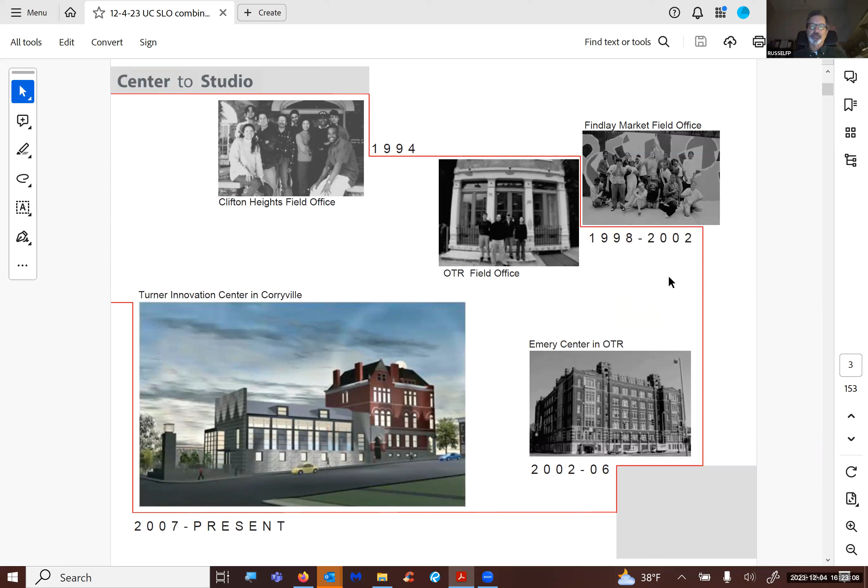The Design Center—I'll show you a few projects to give you a flavor of the kinds of things we have done—but Design Centers are nothing new. Many universities have them; I think around 200 exist around the country. Many are affiliated with universities, but others are standalone nonprofits started by professionals who want to serve the community. Their activities range from technical assistance, which I'll show you a lot of, to advocacy, policy, getting city leaders to move in a progressive direction, and of course education in different forms.

We worked in all kinds of areas, but as I said, the issues we were trying to address were what you've heard called wicked problems, or small wicked problems, and they really required multiple disciplines. So we employed integrated students from all the disciplines—art, fine art, industrial design, architecture, planning, and in later years, engineering, business, real estate, and other disciplines. All of this was directed towards real problem solving and real projects that would be implemented in some form.

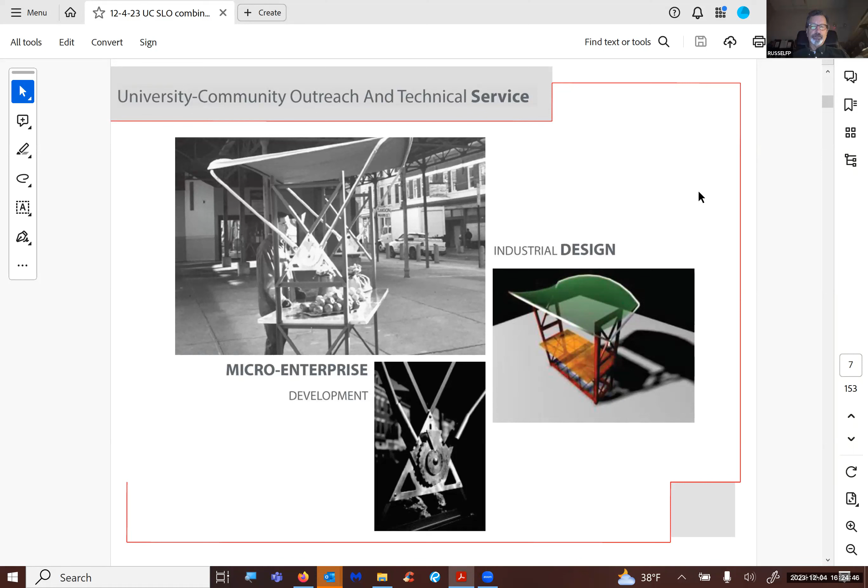Here, for example, is a mobile vending stand, used to help develop micro enterprise among vendors who didn't have the resources to set up their own storefront or even their own cart.

Of course, we worked with larger institutions as well—the Cincinnati School District, to develop a concept that was new at that time. This goes back to the early 2000s: that schools could function not only as specific locations for the curriculum, but also for after-hours facilitation of community-building events and programs.

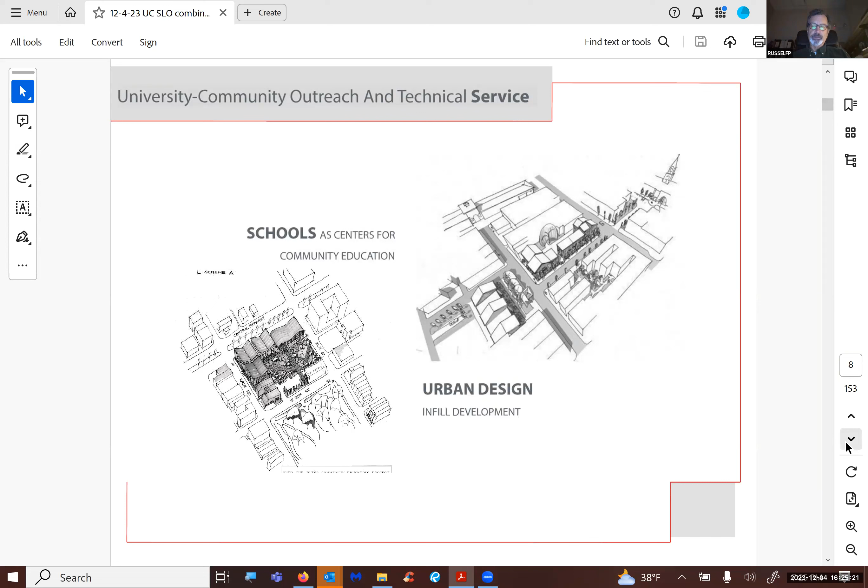And plenty of urban design, because that was my area of expertise. We did that throughout the region, including the urban core of the city. But as I said, there wasn't a lot of traction for interdisciplinary work, even though there was a bit of propaganda out there for it.

So the concept was an off-campus classroom where our interdisciplinary students could meet, because they wouldn't be in any of the classrooms of their schools, which were jealously guarded by their administrators for the use of their discipline only. Instead, this group of students could come to a neutral place where they could meet and work in the studio process, and most importantly, a place that community stakeholders could find, because they never want to come on campus. It's so hard to find anything on campus, and it's sometimes intimidating for them.

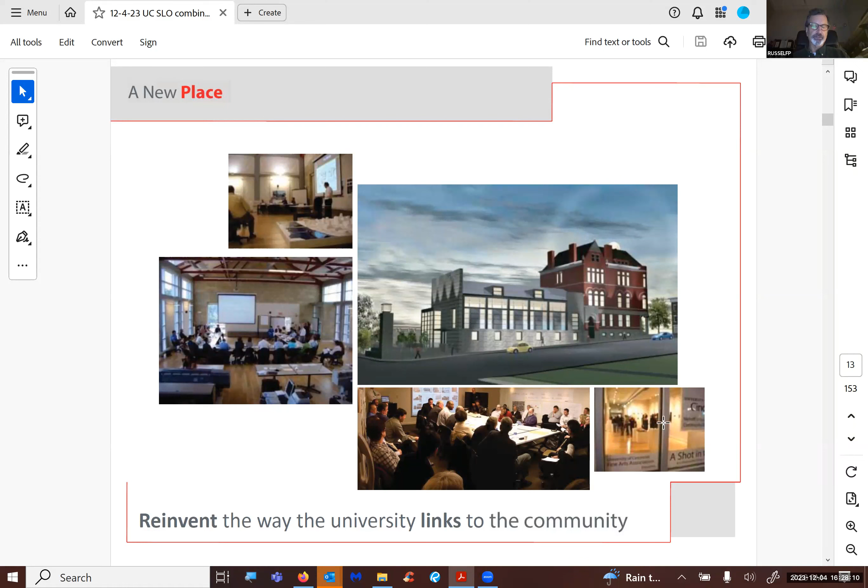So the facility that we ended up in 2007 was purpose-built for us. It's a beautiful space, basically a gym-sized studio space located on the back of a historic building very close to campus, and it accommodates the studio, public presentations, public meetings, exhibits. We have a gallery out front. So it was really set up to provide this nexus between the university and the functions of the studio and the community. And it functioned pretty well for many years.

It's collaborative, of course. We involved all kinds of actors in the community, from leaders in the nonprofit sector, as well as policymakers from the city, as you do in your studios. Most importantly, it was interdisciplinary, because the faculty didn't have a way to collaborate even within our own college.

Sounds simple, but it is not. And it was easy to use the city as the focus of these interdisciplinary efforts, because almost every aspect of the city presents a wicked problem. We also know that more and more our culture, our society, and our demographic shifts are pushing us into cities. So that is really what the world is becoming more and more about.

But the methodology was one to promote collaborative, community-based instruction that would be off campus, with external funding, which we did for many years. And then the outcome, of course, would be those that you would expect: design focused, physically design oriented, enriching student experiences in a unique way, and contributing to the outcome in our community in one way or another.

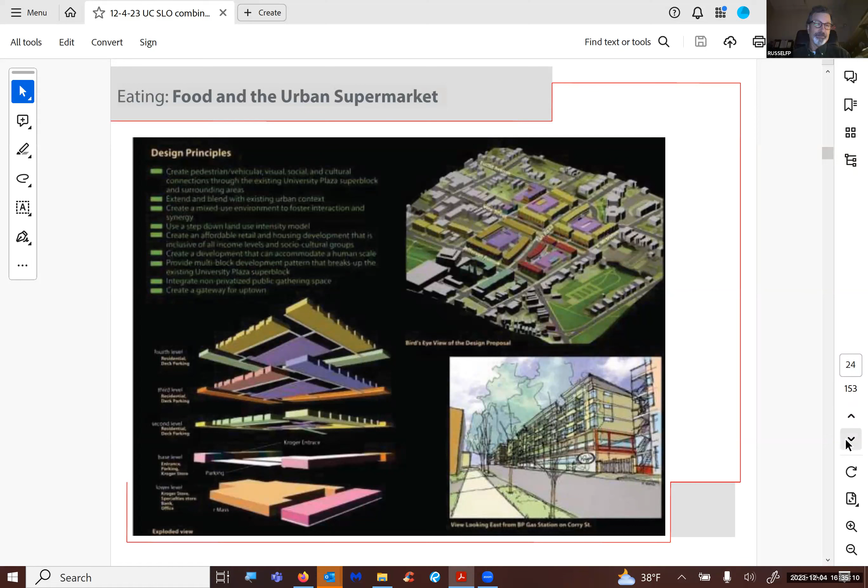Nothing new today, no, not surprising at all. Did they do it? No, they did not do it. They reverted almost immediately to their suburban style. But that didn't keep us from continuing to critically investigate and understand big boxes and little boxes.

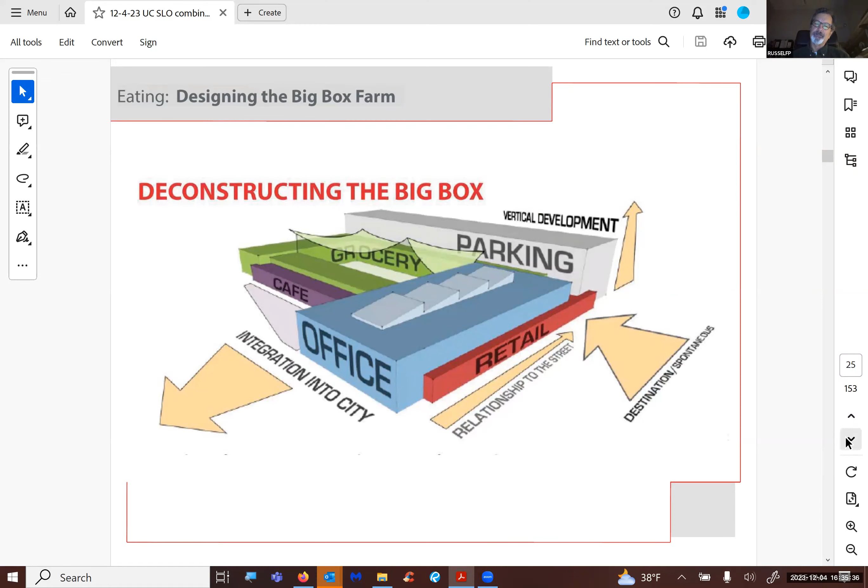So a lot of work went into looking at not only the food retail boxes that exist around our fringe urban area, but also even now within the urban center. So that was always a fun experience and experiment.

We had interior designers working with us and graphic designers. So we had the ability to visualize some of these physical spaces in a way that you rarely get a chance to in one of your specialized studios.

And we also had on the other end of things, large scale interest in understanding the demographic issues that come out of urban planners and urban geographers who participated. Sociology students, anthropology students participated in the studio as well. That really made it a rich environment.

And food was, it seems, quite out of the ordinary at that time to think about organizing design studios around food, but it really tended to bring the disciplines together for lots of reasons that seem obvious now. But at the time, it was not considered a good idea.

It worked out well for us because we felt that the food topic was a way of touching so many different demographic groups, cultures that exist within ethnic groups that exist within our area, and something everybody could relate to. So we felt it could really cut across some of the barriers that existed between people in our city, which is very segregated. What we found out, you've seen a million of these community garden projects.

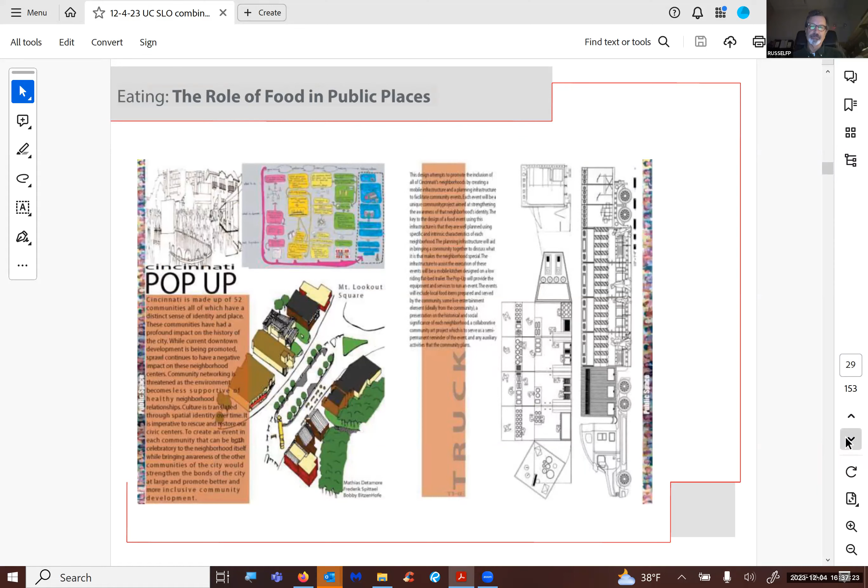Back in 2003, we didn't have many street vendors other than the hot dog stands you'd see regularly. We didn't have food trucks. I won't say the studio led to the food truck culture that now exists in our city, but it certainly opened the door to thinking about that. Later on, we were able to host what became an organization of mobile food vendors so they could negotiate with the city on where they could park, which up until then none of the restaurants and bodegas in the urban core wanted, because mobile vendors took their business. But through advocacy efforts, the vendors as a group were able to lobby the city and get places to park, and now it's very popular.

We could bring some of the studio project ideas to fruition in reality. Interior design and architecture students had a chance to work with a nonprofit job training program disguised as a pizza parlor, which wanted to occupy a storefront in the core. We worked with them through both the Community Design Center, as a technical service project, and the studio, to visualize the storefront and then actually build it. Students had a chance to design-build primarily the finishes, but the interior design students in the classroom actually laid out the entire storefront.

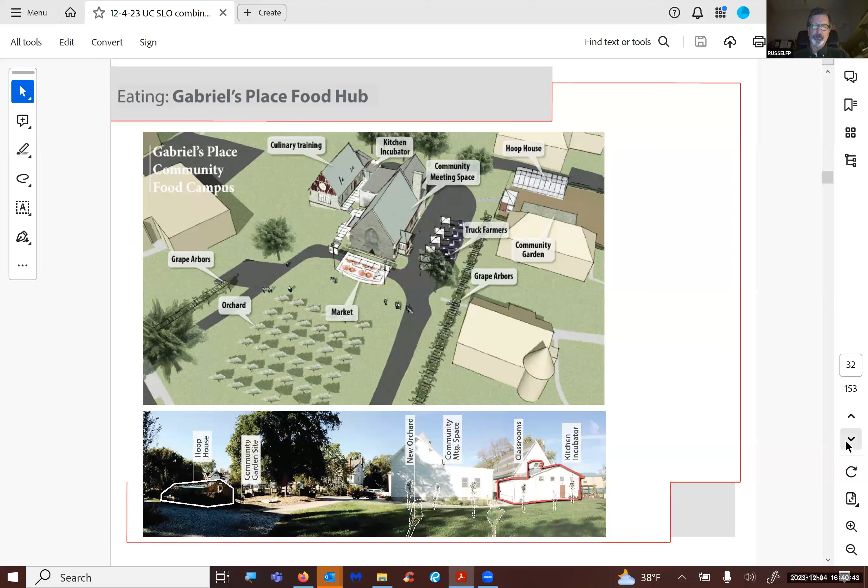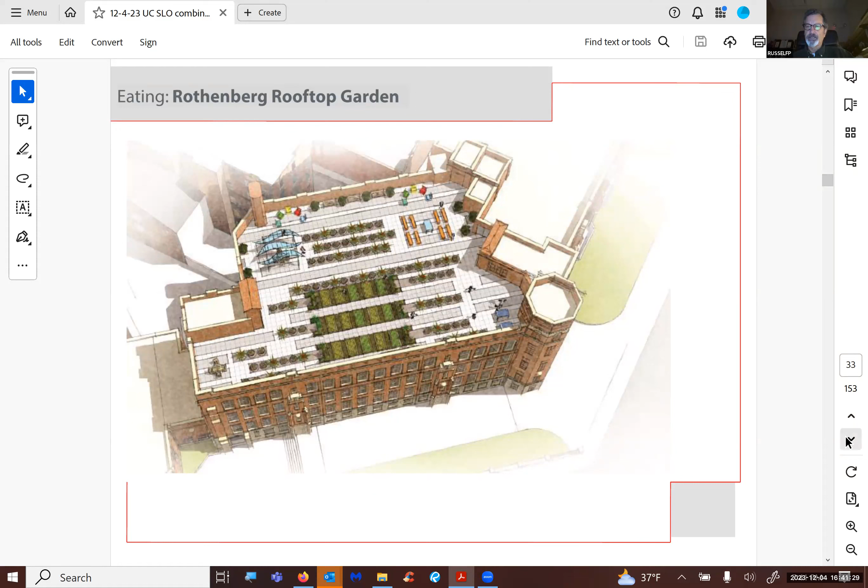And then a really fun project: a 1920s school building in the downtown core had a roof structure originally designed to have an outdoor playground on the roof. These were the days tuberculosis was a major epidemic, and they needed to get students outdoors during recess, but in the dense urban environment, they couldn't put them down on the street. So with the structural capacity of the roof, we were able to develop a rooftop garden for them. This teaching garden still exists today, serving this primary school in the center of Cincinnati. They produce a fair amount of food used in the cafeteria, and their science classes come up to study the botanics of the garden.

And then we got into something we didn't expect—I'm an architect, I don't know anything about food, right? But one thing leads to another, and we realized we needed to help the region develop policy on addressing food issues at a larger scale. Community gardens, sure, but what about small farmers in the hinterland and how they connect products to urban points of sale? What about sustainability issues and advocating for those through policy at the city or county level? So we supported this idea, which existed first in California, called the Food Policy Council, to develop a strategy and advocate for a comprehensive food system in our region. This led to the establishment of the Greater Cincinnati Food Policy Council, which still exists today.

Ironically, the entity most resistant to progressive food policy was our own university. As we developed this concept of the Regional Food Policy Council, we were constantly asked: what's the university doing with food? You have 40,000 students, certainly consuming a lot of food resources. What are you guys doing? So we spent a year looking at the university and developed a pretty critical report on how their food systems function on campus.

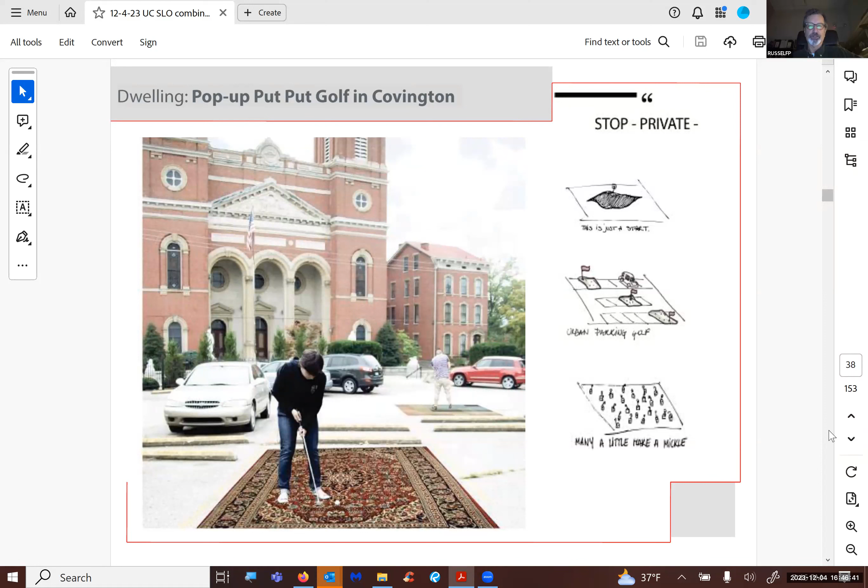Thanks. Dwelling, being in space, experiencing space, living space experience. You undoubtedly had participated in some guerrilla urbanism. Our students had a lot of fun doing that with lots of different groups over time, going back to the early, late 2000s, when it just wasn't happening that much in Cincinnati, at least. So that was a lot of fun.

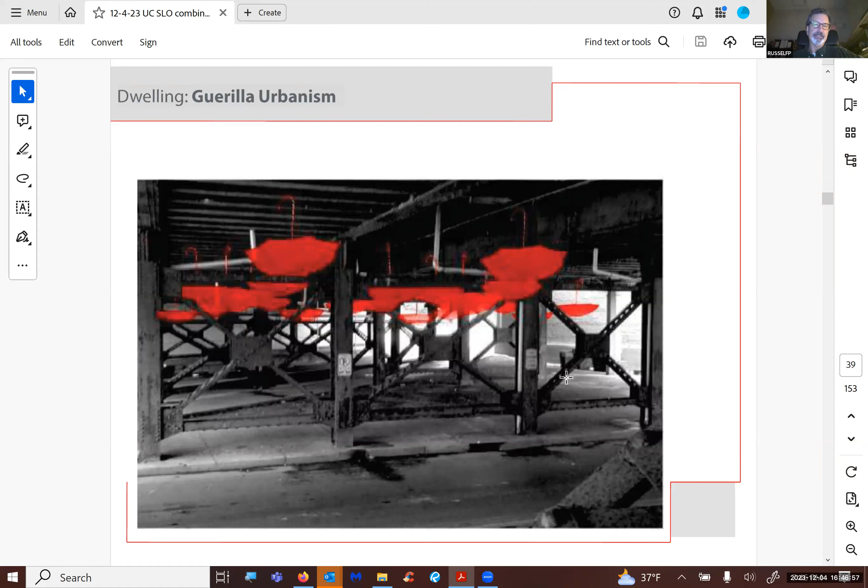How to activate space - some of these were implemented, some were not. This one was not implemented, but I thought it was a great idea. We had competitions for students to look at how to activate spaces in a guerrilla approach, to stimulate thinking within the community and among policymakers about how some things could radically change our perception, understanding, and experience of even the simplest spaces in a way that was really valuable.

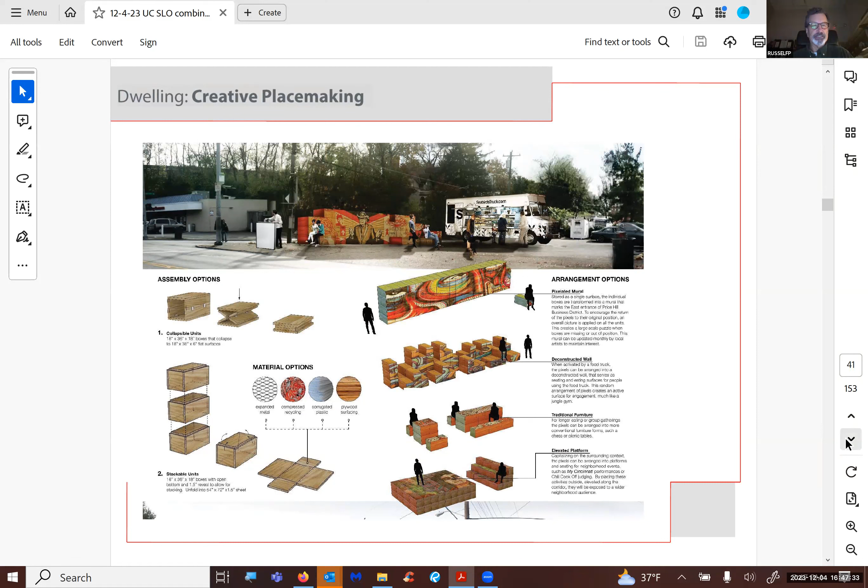Creative placemaking is something I'm sure you've been involved with, and that was something our students engaged in with numbers of community partners. Through the technical assistance aspect of the Community Design Center, we were able to implement some of these creative placemaking concepts.

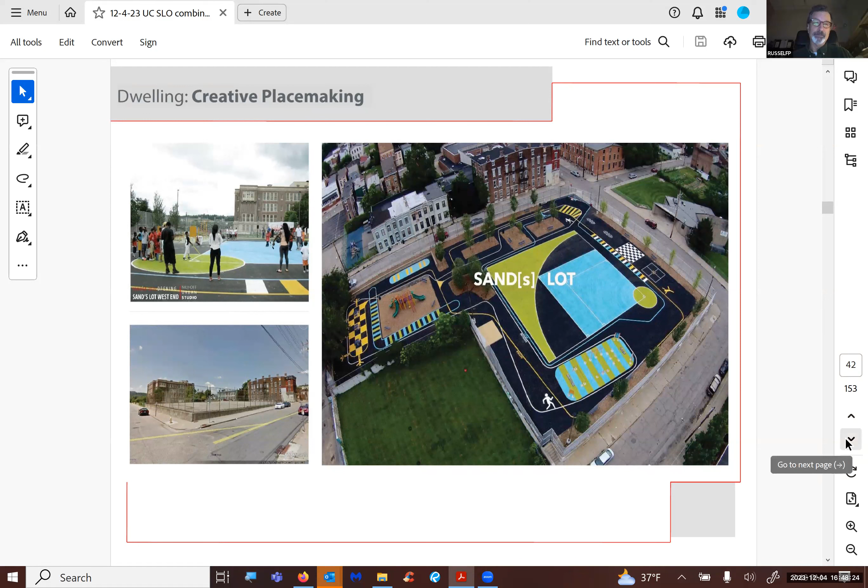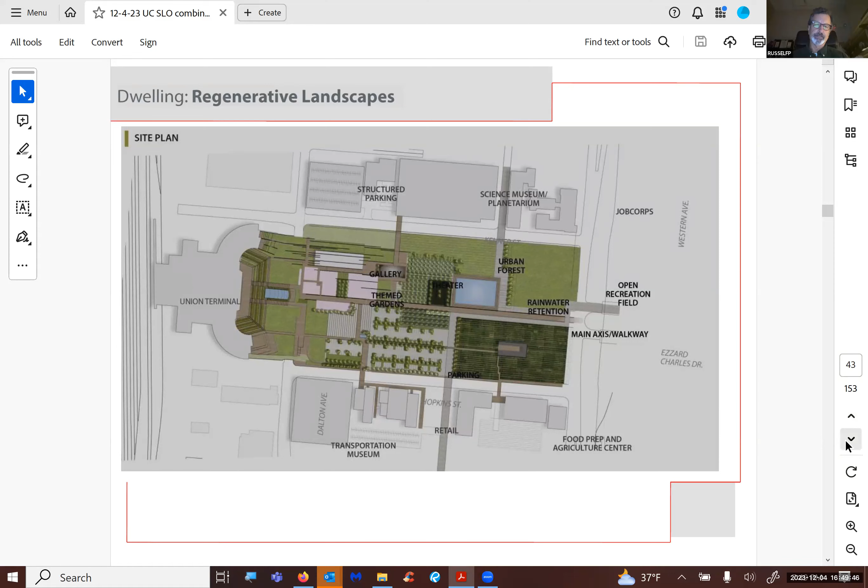Our interest was how that district could be reconstituted to be, in this particular iteration, an institutional district of more than just one, and how the space that knit it together could go beyond just providing a landscape, but could be a regenerative, productive landscape in a useful way. In Cincinnati, we have a tremendous burden of rainwater and stormwater - how we address it, retain it, divert flooding in our area, and of course, food production.

So we're constantly engaged in a bit of a political struggle. The studio was at a time period when the mayor was attempting to introduce a levy which would raise money to support the parks that existed in the city. So we were engaged at a political level at one point to actually promote a levy, which did end up failing, but was interesting to be part of that machine. The students got a firsthand look at sausage making in the political process.

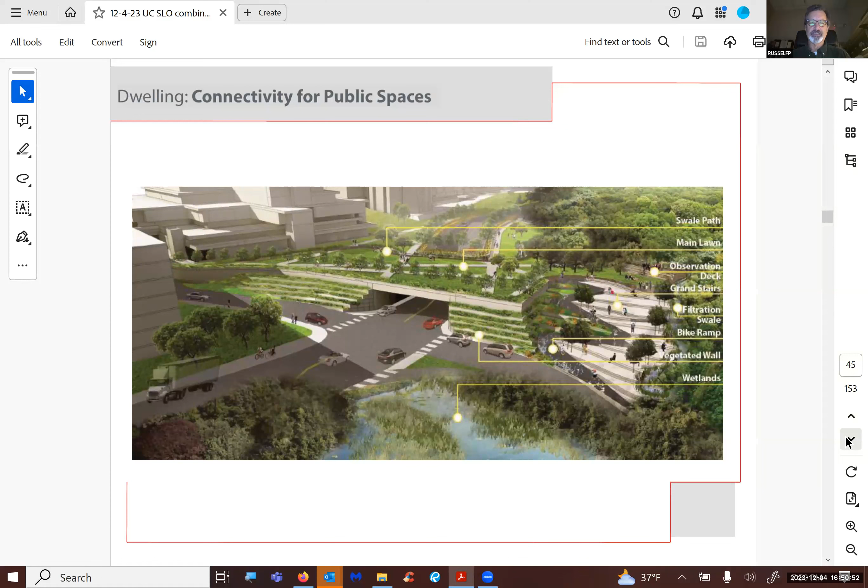Some of the proposals that came out of that involvement included this. This is the north side of campus, trying to bridge over between the campus and existing park, thinking about how development can occur in a friendly way, because it's not about the parks really. It's about everything that happens around it, and how that can activate the park, make it function on levels it wasn't functioning on earlier, and provide much needed activities and functions, in this case housing at the perimeters of parks that would put eyes on the park, make it safer, friendlier, and more activated.

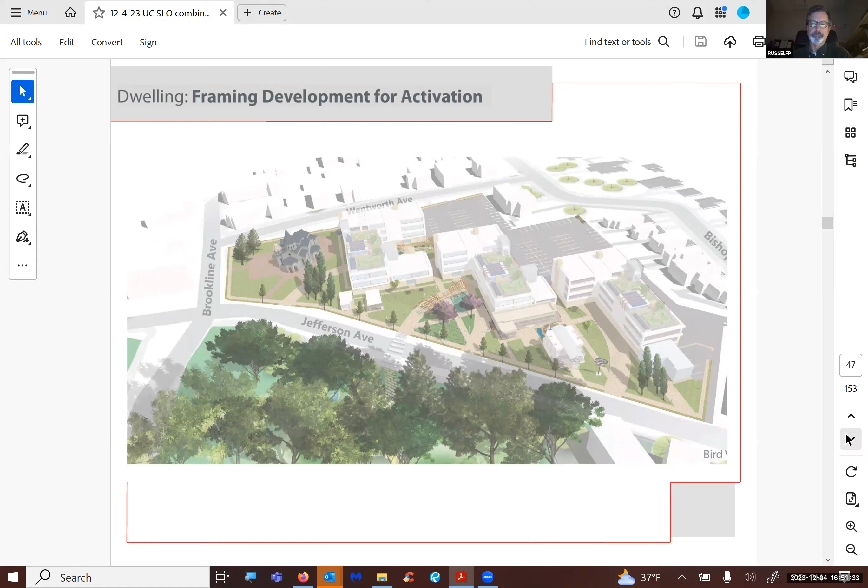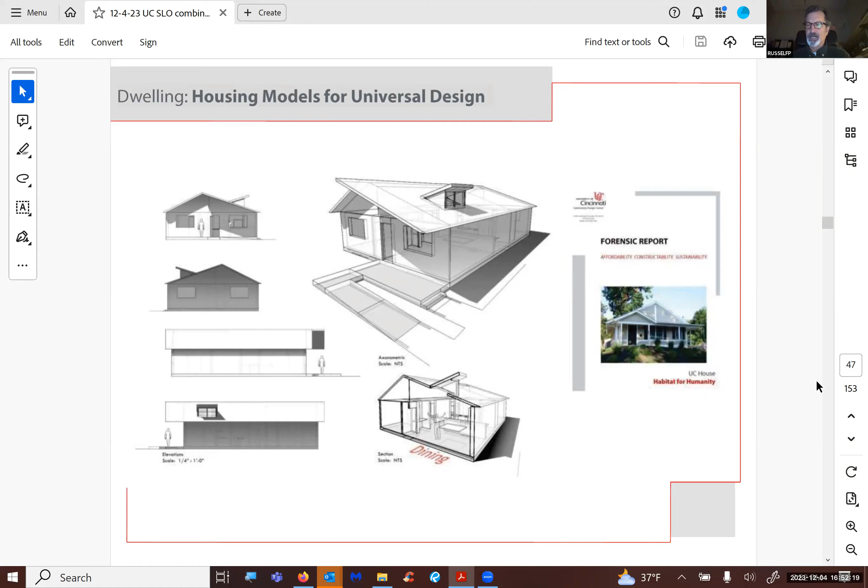And then the interesting part about this, we were able to follow up and do a forensic report. How did they actually utilize the materials as we suggested? How much sustainability was the final product? Did that represent?

Lots of thought going into how different districts of the city could be developed for new housing, infill housing, in a district composition that would create sub-communities, if you will, within the urban core. The urban core remains in large part very decimated here in this Rust Belt city. So lots of thinking about how we would approach infill and the affinity of different districts within the center.

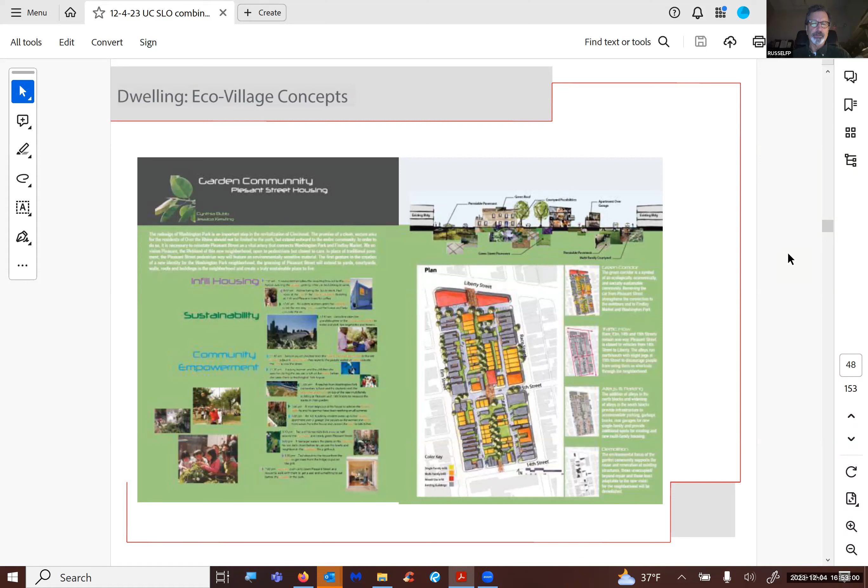Thinking about what we do with all the vacant space that exists in a Rust Belt city. We can't refill all those storefronts with retail - there simply aren't enough consumers, there aren't enough rooftops of residents in the city to actually supply a market for all that existing storefront space. So what do you do with that? How do you construct a model that helps policymakers promote an approach to the revitalization of the city that can address some of these typological features that exist, which is a multi-story building with a storefront below.

And then thinking about other models of dealing with emerging demographic groups, aging in place. How could our seniors stay in the neighborhoods they want to be in? How could they occupy communities different from what we typically see for retirement or continuing care communities, but constructed in urban cores that could take advantage of the amenities that exist there. The university asked us to look at whether we could do something near campus, so that old professors like us might want to live near campus as we age, cross the street and take advantage of all the facilities on campus, maybe engage with students long beyond our teaching years for a multi-generational experience - have students live in our building and look after us to some extent, or grad students with families who want to live near campus but want a multi-generational experience, creating an environment synergistic between the ages.

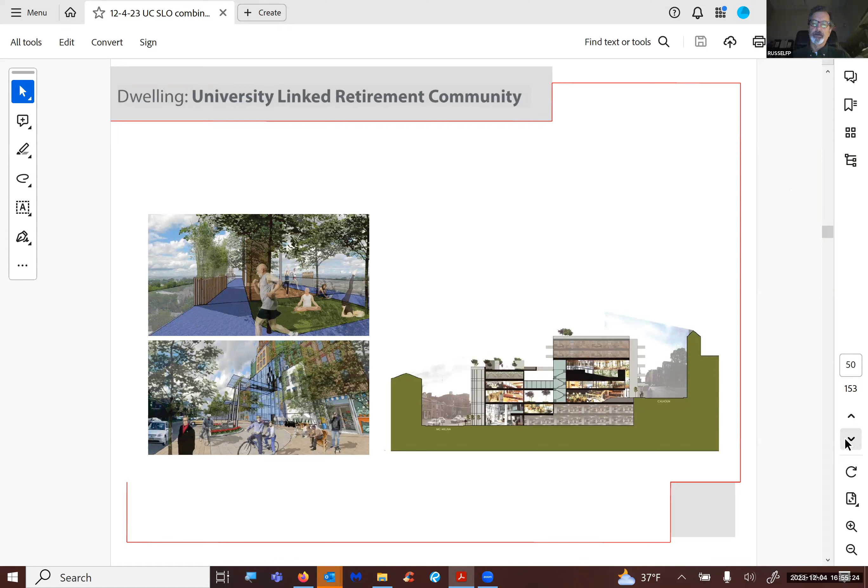So this was an interesting experiment. In fact, they tried to market this concept to alums of the university, and they're still working on it today. I've heard, although I haven't seen the plans, that they may develop something near campus that would reflect that idea.

Cool. Hey Frank, I have a question about your previous theme - have you guys thought of changing some of those storefronts into residential use?

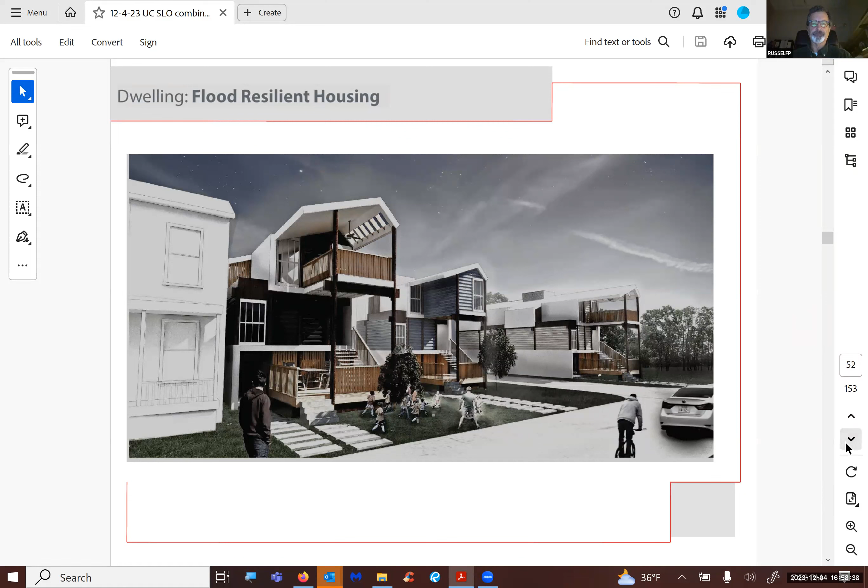Okay, I'm going to pause there for a second before I get into moving. Any thoughts or questions about dwelling?

I do have a question about something you mentioned. You talked about how there's a lot of vacancy in Cincinnati, and I'm guessing it's because of the Rust Belt and industry that moved out—I don't know too much about Cincinnati, but that's probably it. I remember in another class we learned about a small city called Garyville or something like that, and they had a lot of industry move out too, so they started downsizing their city, implementing measures to concentrate people into a downtown area that's not as spread out. But I don't know if that would work the same in a city as large as Cincinnati. So I was wondering if you do anything similar to that.

Yes, it's called the shrinking cities approach—trying to concentrate and gather functions in a way that's scaled relative to the markets or needs. Absolutely, I'll show you one image of that. That's exactly right, very progressive. There's a group—our partner center in Cleveland—that has published guides on how to address shrinking cities. Cincinnati, by Ohio standards, is doing pretty great. Northern Ohio has places like Toledo and Akron, old steel towns that literally lost all their industry, and they have all this infrastructure, miles of roads and things of that nature. So they do have to shrink and consolidate, and that's an approach we should all be aware of.

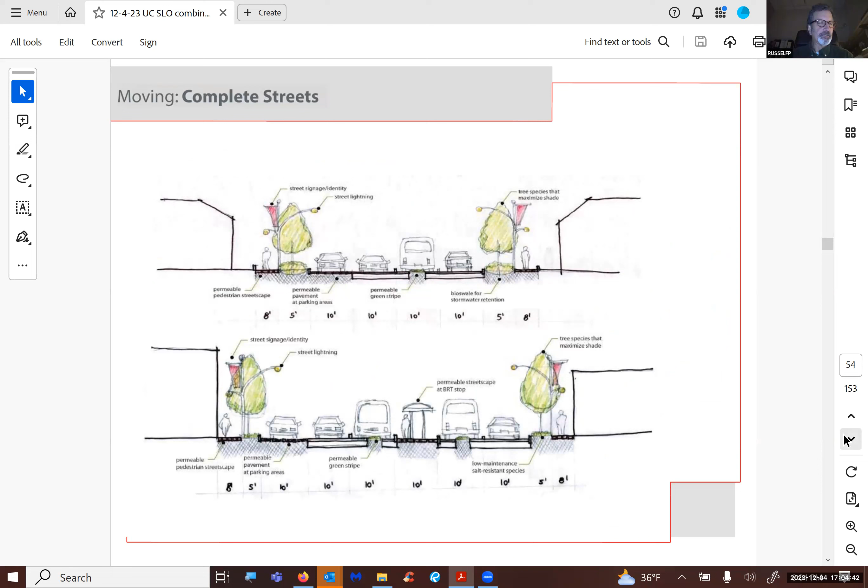So we introduced this concept of BRT, worked with our metro agency, and explored different approaches, many of those related to complete streets—it's got to be part of that equation.

What happens at the hubs, and what kind of development can occur around them—transit-oriented development, which you're very familiar with. But in Cincinnati it's got a different flavor, because we're really trying to infill these more urban central locations rather than develop new TOD at the periphery, and how bus rapid transit can work with these infill transit-oriented development clusters.

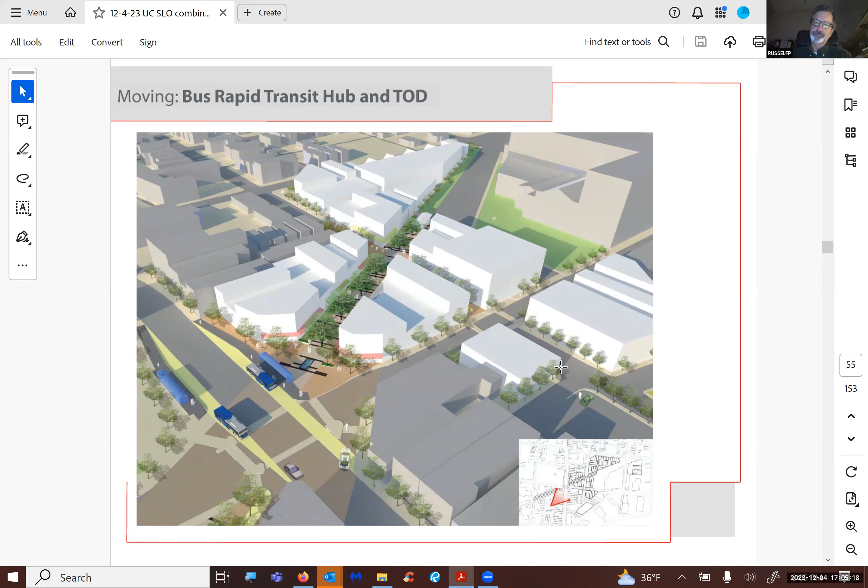And bikeways—which now are everywhere, but go back, and it wasn't happening much. There was rails to trails, which we had some of in the periphery of our city, but nothing in the urban core converting rails to trails or any other separated bikeways.

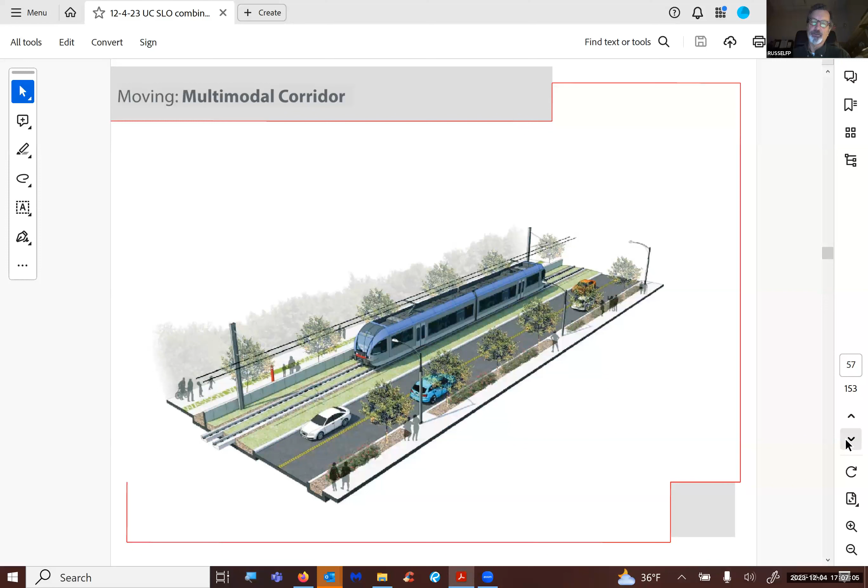So there was quite a battle between the bike people and the light rail people. We got ourselves right into the middle of that, and that was no fun at all. But in the end, the bike people won, and the city bought the remainder of the rail right-of-way, and now there's a really nice separated trail that goes, not right through the middle of downtown, but through the streetcar suburbs, the next layer out from the center of the city.

We had fun exposing them to ideas of the green infrastructure that could occur along the bikeway, that would handle some of what is our stormwater retention issue in this area, as well as hard infrastructure that could exist to complement those urban areas close to town or close to the center.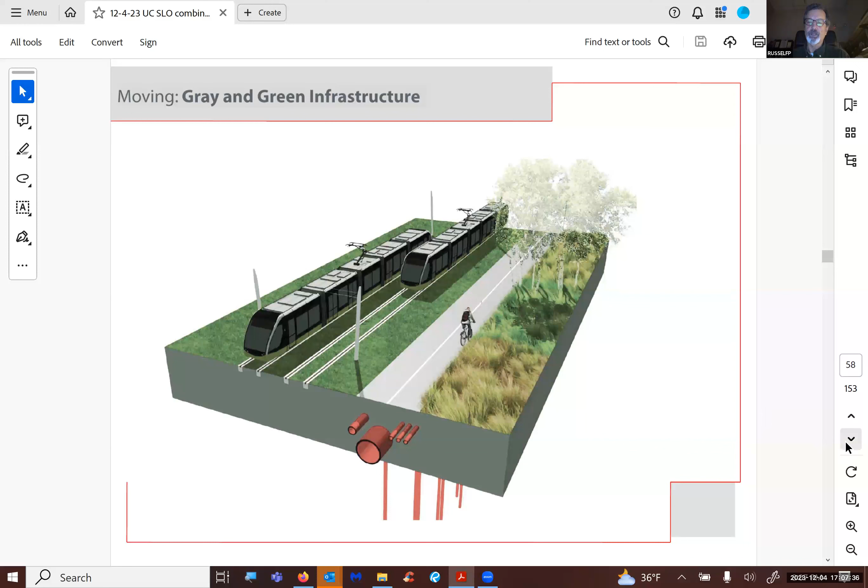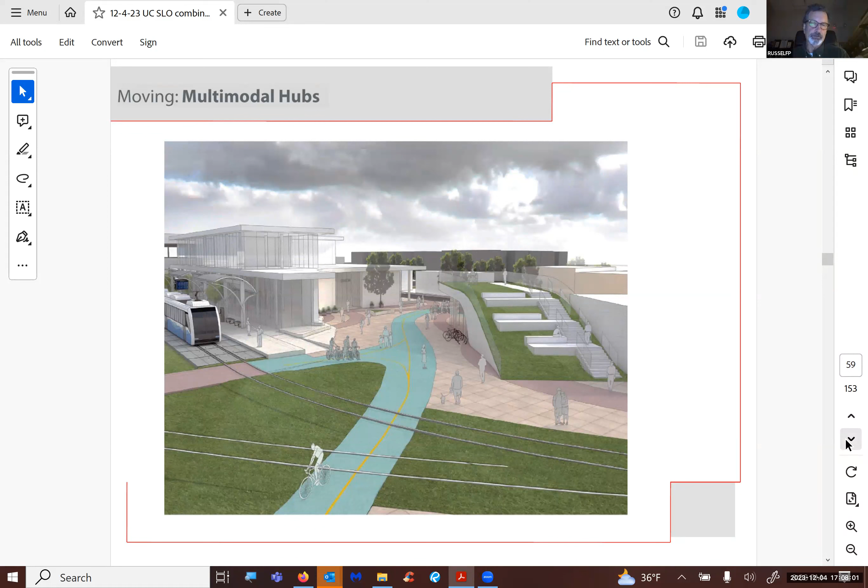And then multimodal hubs, how could we expose our partners to the benefit of multimodal hubs that could occur both along this bikeway, future LRT routes, BRT routes, and what kind of functions could occur there that would pull these all together into hubs, which would be the heart of a TOD, an infill TOD in various locations of the city.

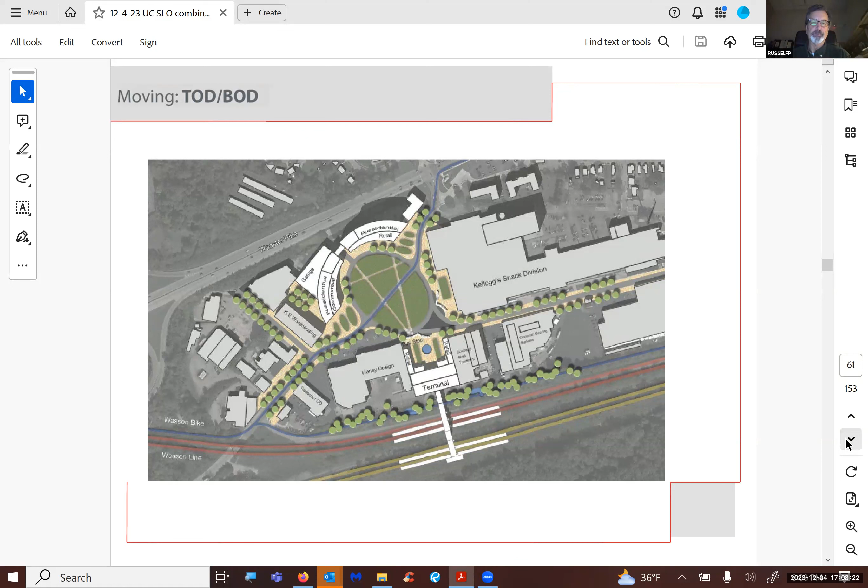Here's another example that's sort of at the periphery of the city. None of these got implemented, but they will hopefully expose people to the ideas of thinking about how these hubs could occur and how TOD could occur.

Coming back to the question we had earlier about shrinking cities, here is a BRT and a bikeway path, not the same one I showed you earlier, but a different one along one of the major corridors. Thinking about how they did implement a streetcar in Cincinnati, but it's really just in the downtown core. Thinking about how a streetcar could be implemented that would reach further out into what actually used to be streetcar suburbs or the near-in suburbs. This would be, to you, very dense neighborhoods.

And how the areas in between those dense nodes could be preserved for other uses, whether natural uses or agriculture. So we did spend some time looking at that, and there's plenty of underutilized land, even within the city boundaries, that could be repurposed in a way that could consolidate some of these uses and make these nodes more dense.

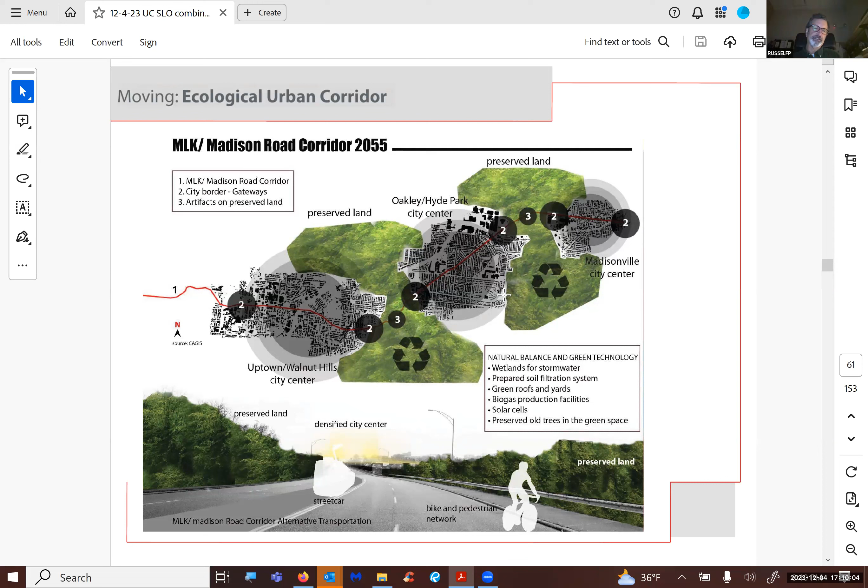You probably know that without density, mass transit is very difficult to sustain. So Cincinnati lacks the necessary density along the various possible routes to really support mass transit, whether it's light rail transit or bus rapid transit. So one of the goals of this exercise was to illustrate how you could promote that density by shrinking and consolidating, as you discussed in the previous question.

This last project is about typomorphology, which I know your professor loves so much. I've already gone an hour, and I could of course go on a whole other hour, but I have a project I can talk more about, the typomorphological study and proposal for the region. But I'll stop there now and see what you want to do.

I would love if you can talk about the typomorphological project, because interestingly enough, every time I teach typomorphology in urban design, I try to do that. That's the dimension I teach that's most difficult for students to gather. I don't know why that is the case. Perhaps because most of them don't have an architectural background. But at the same time, I think it's one of the most important for planners.

So up to you. How many people are still awake in the class there? Everybody's awake. I'm doing something that is one of the worst practices in education, which is lecturing at you. The more fun structure for teaching and learning is interactive, right? And what's happening now is not really an interactive process, but it's what we've got, so I'll continue. That's the nature of Zoom, Frank. We can't. It is the nature of Zoom.

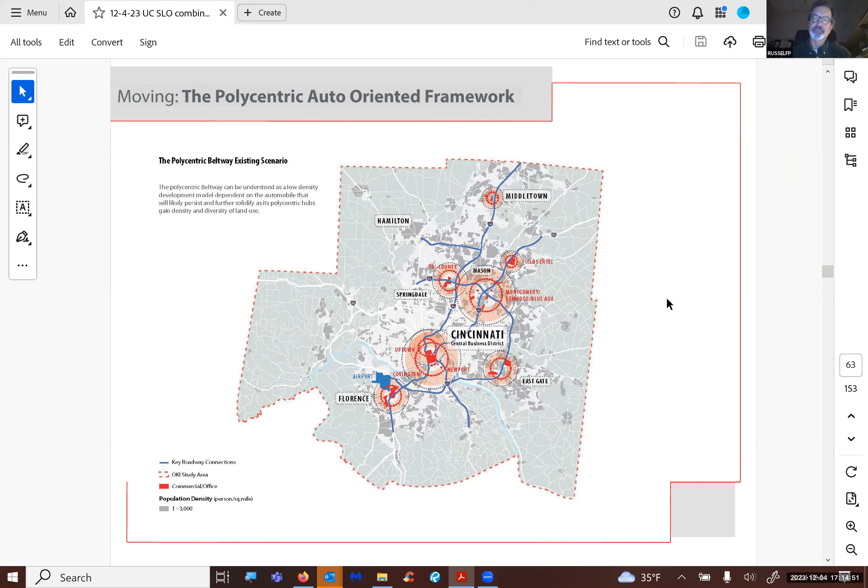I can't get into, we're not going to have time to get into the whole research study, but I'm just going to talk about the typomorphological study of Cincinnati and the movement systems that exist. And it relates to something you have to understand before we get there. This is the final product, but I'm going to go backwards here.

Here's our metropolitan MSA, metropolitan statistical area, our urbanized area. It stretches quite a far way north and south across the river, which you see in light blue, into Kentucky, a different state, and also west into Indiana, a different state. It's quite a large area—we're about 2 million, somewhere in there. Nothing by California standards, but we're a very flat city. Our metropolitan area is very spread out.

Here's the landform, the topographic landform. The city of Cincinnati is right down here in this little mouth. Can you see my cursor there? You have a valley here and a valley here, and then you have some highland plateaus—not highland by California standards, talking like 700 feet or something. And highlands in Kentucky as well.

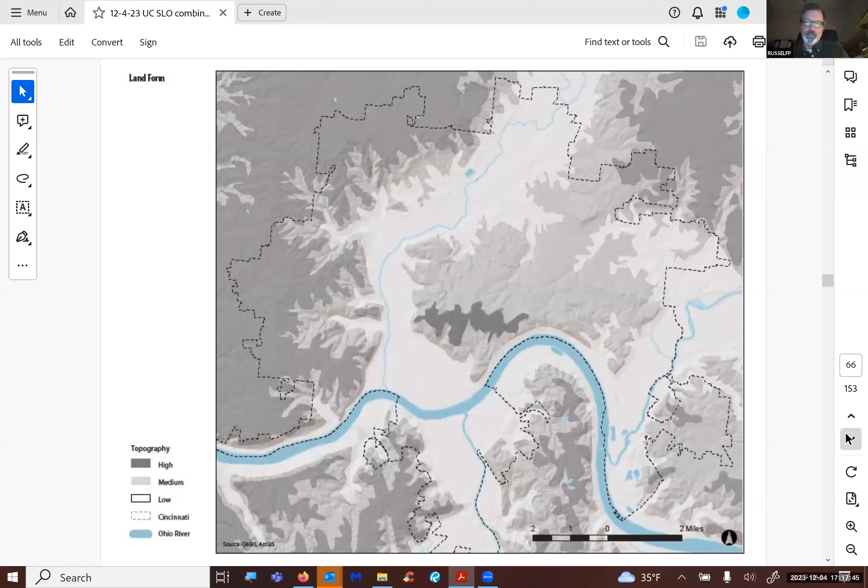And the river is central to not just the identity but the functionality of the city of Cincinnati as a market, right? We were one of the westernmost frontier towns going way back. The river allowed us to connect to markets and bring the product of our area, our agrarian product, to other markets. This is my rationale, but water has driven and continues to drive the morphology of the region. It really does, and that's no surprise. Maybe for you it's lack of water, but for us it's an abundance of water, and not just today but going back.

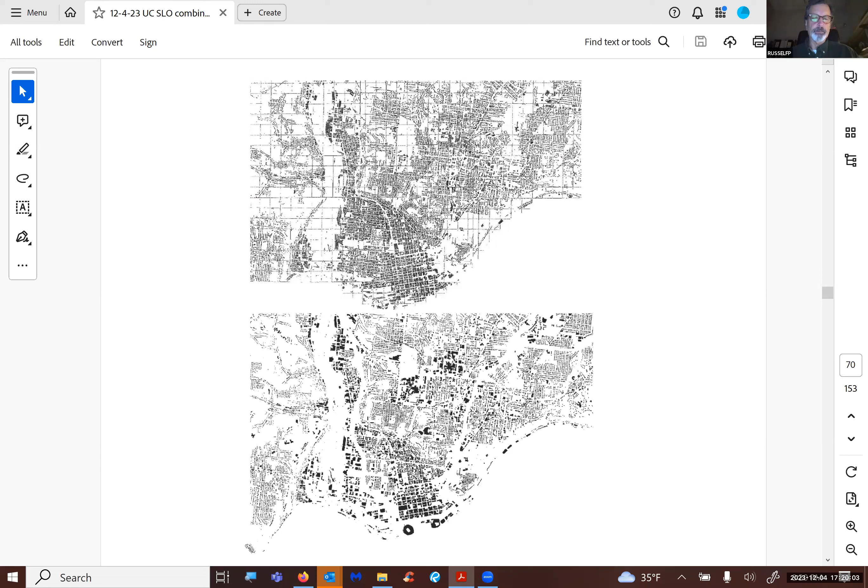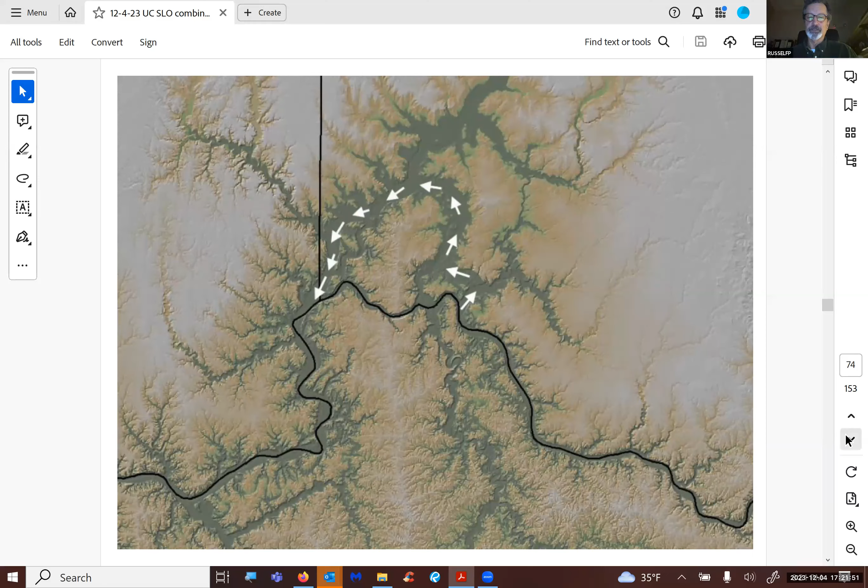The geology was sedimentary, basically the bottom of an ocean. That's where we were, as you were too, but you got tossed up there in a violent way later on. Well, our area stayed flat, and the upper diagram shows the kind of forms that existed at that time. There's a little bit of heaving, not a whole lot. This is actually called the Cincinnati Arch. But when the glaciers came through, they just cut that off.

With the melting of the glaciers and the deposits, different topographic forms were created. We don't refer to them as mountains here, they're hills, but whatever small changes in elevation occurred from erosion and the action of the glaciers. This is what we have today.

As the glaciers cut the plain, the ocean bed, and then receded, they deposited things. It's relevant because our development occurs on the stability of what it finds underneath. So this is what you see in our area: these striations or layers of sedimentary rock, clay, and other materials.

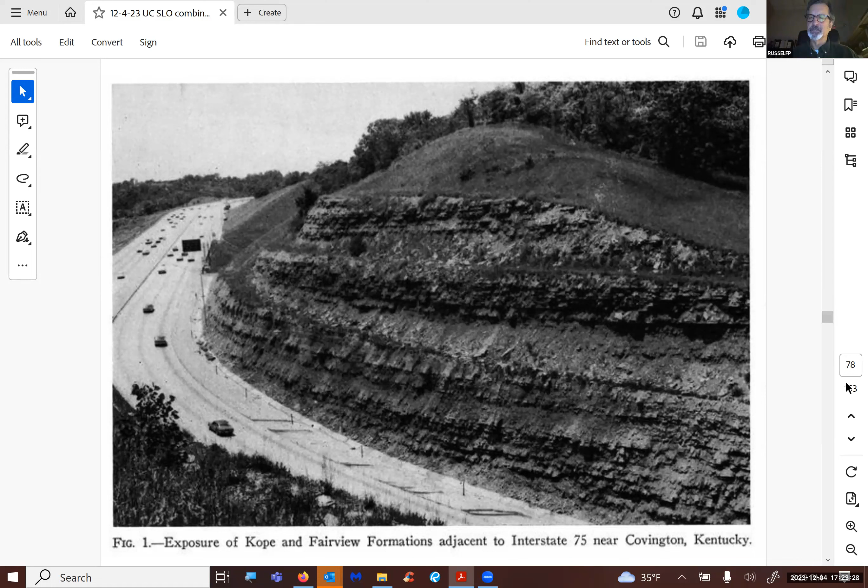What happens is the water, it's called Kope. The water falls on the upper levels, the plateau, then percolates down into the ground and finds its way horizontally when it hits these layers of harder material, moving horizontally and coming out at these cuts or escarpments that were eroded by the glaciers earlier. Each layer is separated by clay, so when that clay gets wet, it becomes slippery and starts to slide. So that stone will just slide out, and whatever's on top of it will slide with it.

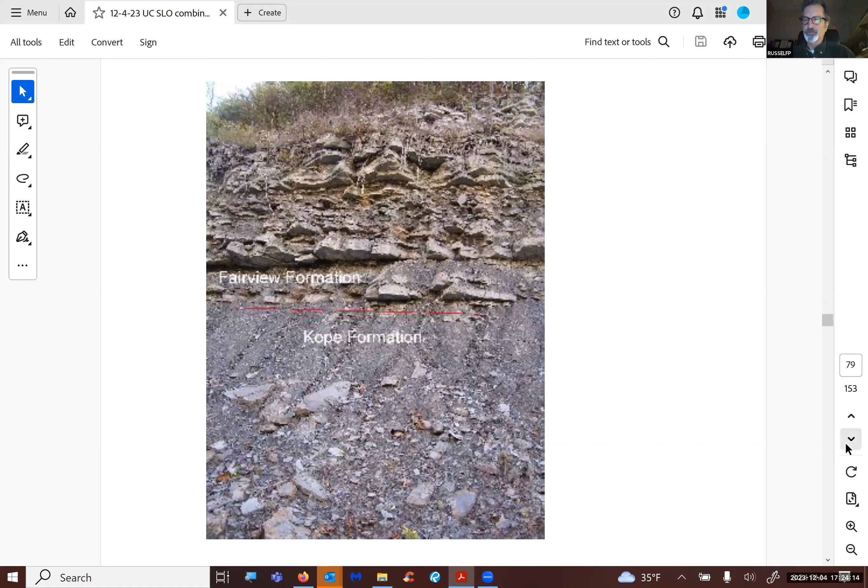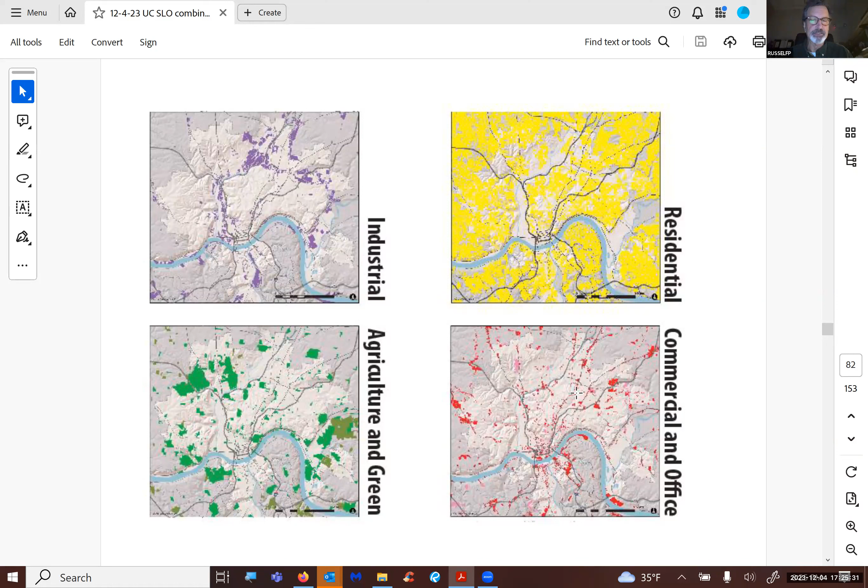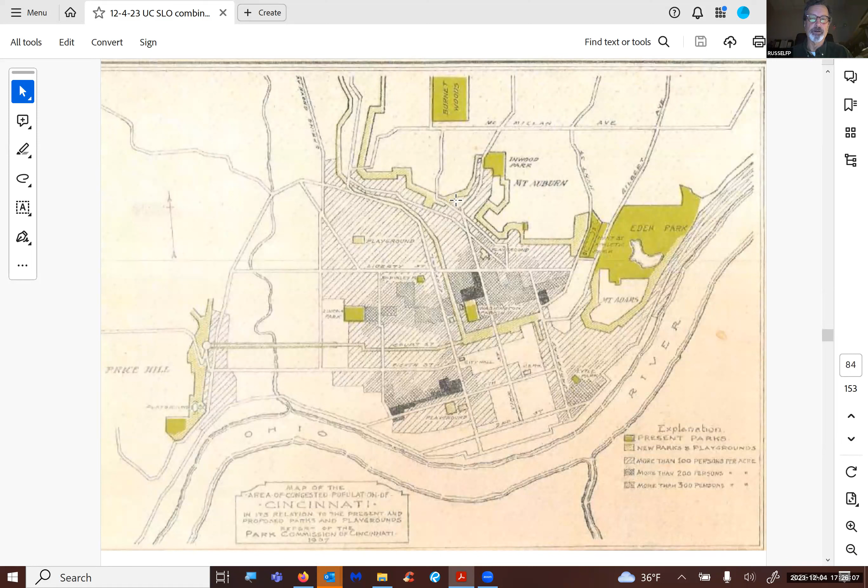The upside of that was that it all became parkland, or much of it, which is great. So now we have these wooded hillsides all around Cincinnati, which retain much of our green character as you look at the city from above or in vistas. You see here, for example, this is following the green, a plan from 1907 following the edges of some of these hillsides, which was very valuable, recognized even then as an asset that was accidental in a sense, but a product of the geology. Here's another example of those lines of undevelopable area which became green space.

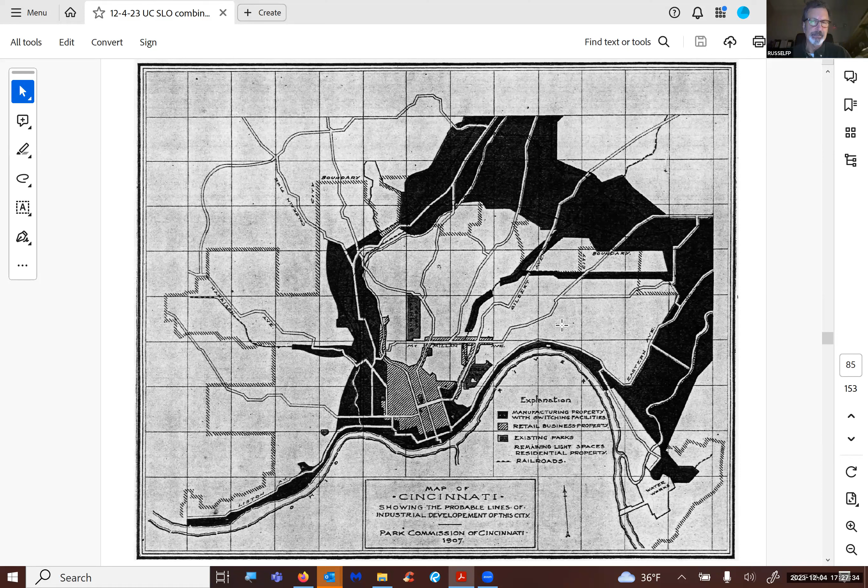Conversely, flat areas were the only areas left over to develop on with that technology. So we had the core here, which was mixed use, highly residential, very constrained by the hillside - this is the upper plateau, the lighter area. But a valley offered opportunities for industrial development. Remember, this was the previous course of that river, which was redirected to today's pathway, down here. The presence of that previous river created that lower plain, the valley, that could be developed with larger footprints, industrial uses and things of that nature. Unfortunately, it was low enough that it could still flood, so much of it could only be used for those types of uses and not residential. The residential had to cluster up here on this little perch, about 30 feet above the valley floor, but below the plateau where the university is, because the transportation technology wouldn't support daily movement of goods up and down from that hillside in the early 19th century.

So people refer to Cincinnati as the city of hills, city of 7 hills, but it's really a city of valleys - a bit of an archipelago. The neighborhoods are broken up because of these valleys and this topography, generated because of the geological actions I described.

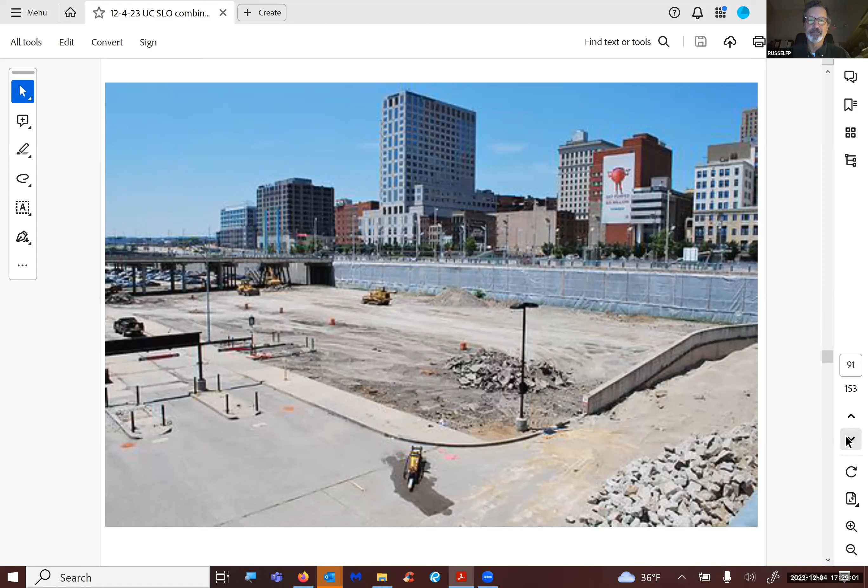So what they did was develop a flood wall further back at the edge of that area that was flooded, as you saw in the 90s image. That is essentially our flood wall, and above that are developed platforms underneath the street grid that exists - this again is the area of flooding. It's all parking under there, so you have multiple levels of parking decks, and the water can actually flow through those decks. If we have another inundation, the water will flow through and get back out.

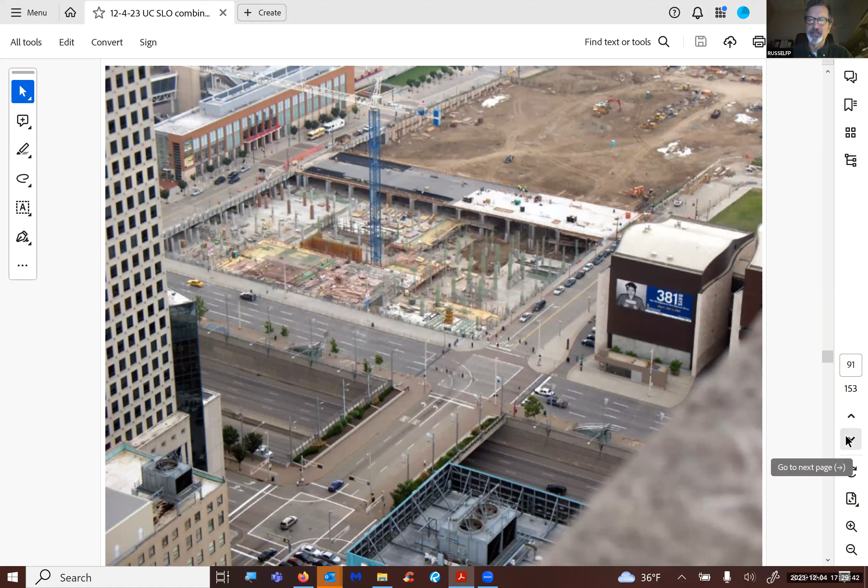Essentially, we've created a platform above that floodable area on which we constructed this mixed-use district called the Banks District. It's basically where the sports bars are, the stadium, and there's some residential there and a couple of office buildings. So everything here is a giant platform above that floodable area - that's one way we've addressed the forces of water in the downtown core.

We also have a tremendous problem with combined sewers, meaning the stormwater and the gray and black water are mixed, because our system was constructed in the 19th century with no concern for separating the two. I'm sure in California it's separated - we're in the process of trying to get them separated. But what happens when we have a major storm event is the sewers get overloaded, and they can't treat everything coming into the treatment plant, so they just have to let it out into the river. So the US EPA has a consent decree against the city to remediate the issue.

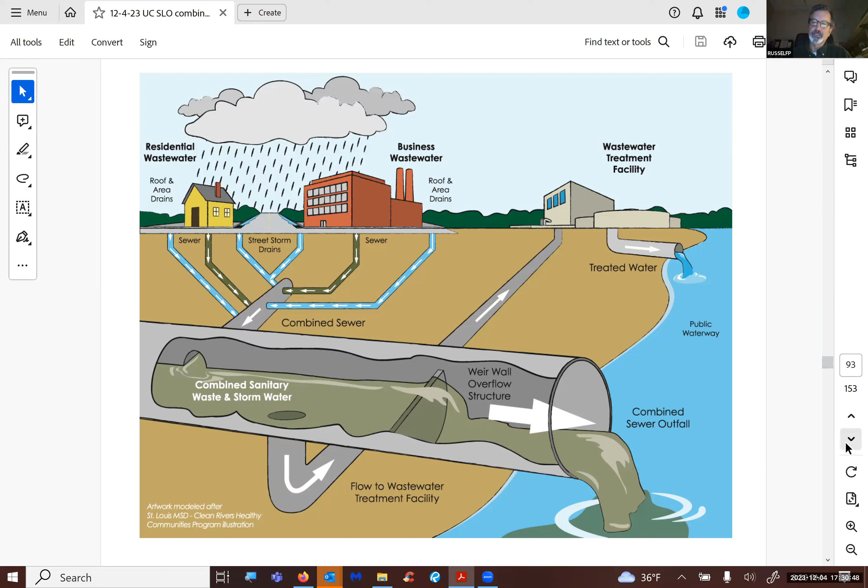There's a lot of controversy about the removal. How are they going to be doing that? Eminent domain. Yes, and it's complete. I'm sorry I don't have any on-the-ground photos, but it is complete now.

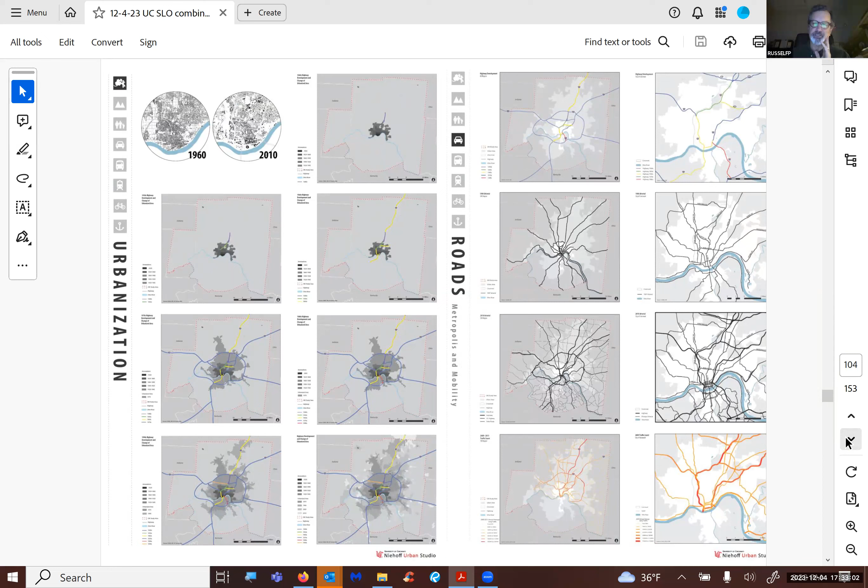I mentioned Cincinnati is a regional city. We spent a lot of time in this research project comparing the cities and looking at every aspect, all the roadway systems between the three cities. So we had a comparative analysis of all three cities at multiple scales, national and very local—all the different infrastructure, whether bike or pedestrian, demographics, all the stuff that planners look at.

But my particular charge was to understand the morphology of what was happening in our MSA or urbanized area. So we had a lot of fun trying to understand what was happening. It seems so obvious, but when you really start to drill down, we discovered some interesting things.

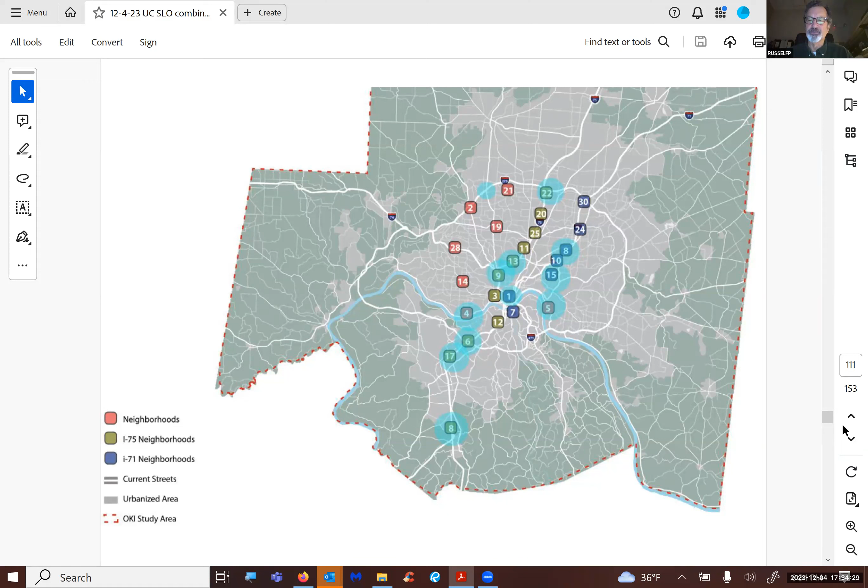Here's the downtown, but I'll skip over this fast. This is sort of fun, not something architects get into much, but we wanted to look at the transect of various corridors that exist in the city. We sampled different areas of the metro to see what they look like and did a basic transect analysis, which is fun.

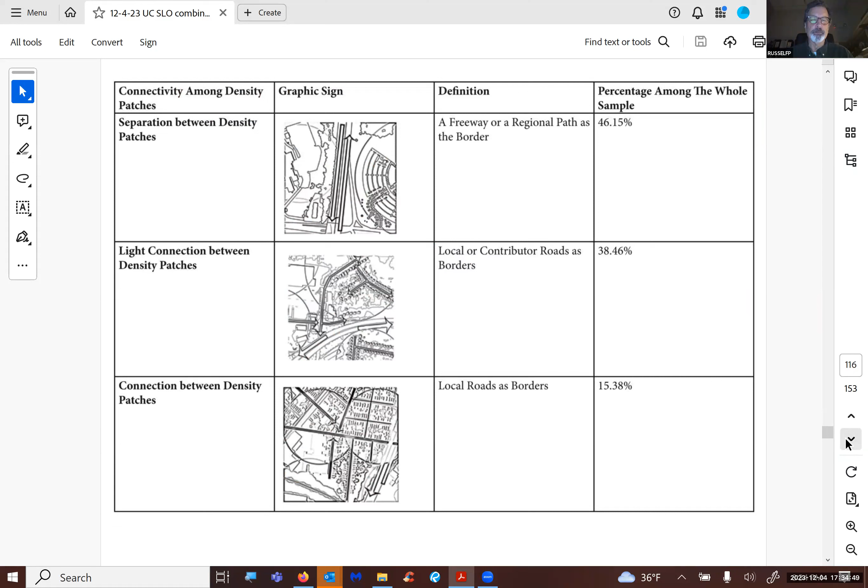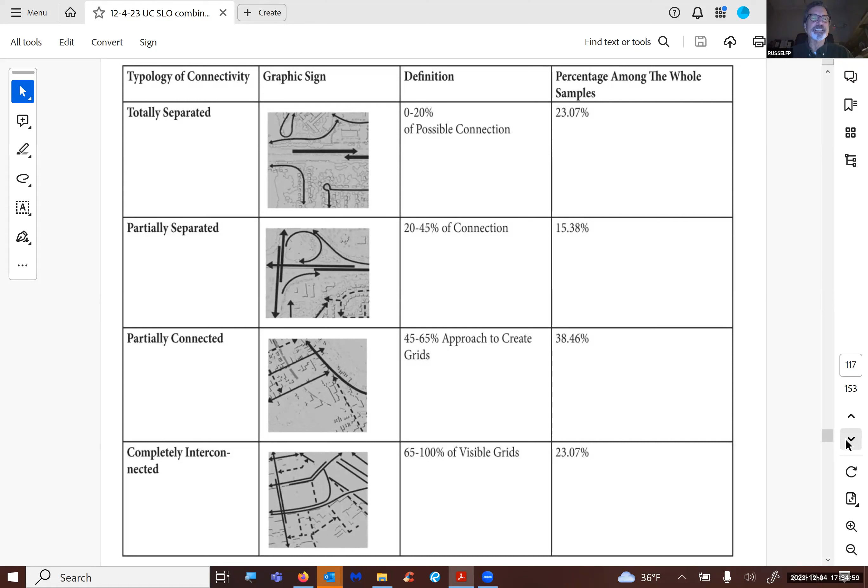Based on different characteristics that occur even within each sample—the roadway configurations and built form configurations—we tried to abstract those in a way that would help us conceptualize them a bit more. Then getting into quantitative analysis of those samples, which was fun but sort of tricky. This is going to lead nowhere, by the way, but I just want to show it to you for fun.

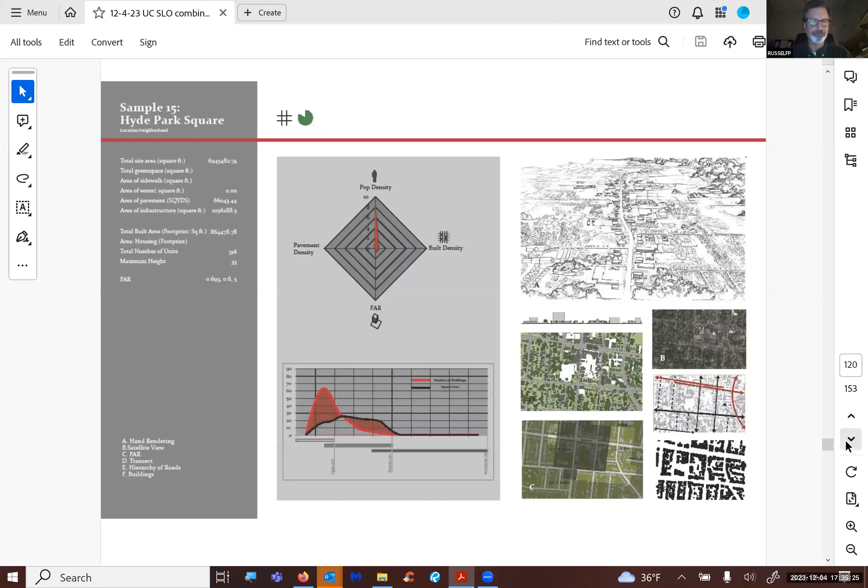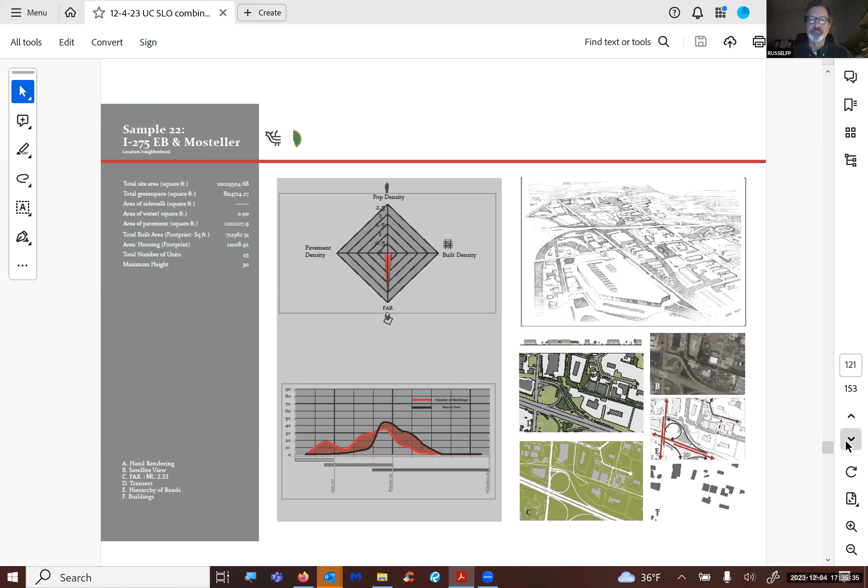We started looking at different aspects of the built form and laying them out graphically to compare them and see if we could understand anything. We looked at dozens of samples, different types of uses, whether primarily residential, mixed use, or primarily industrial, trying to see what we could understand relating these quantitative factors.

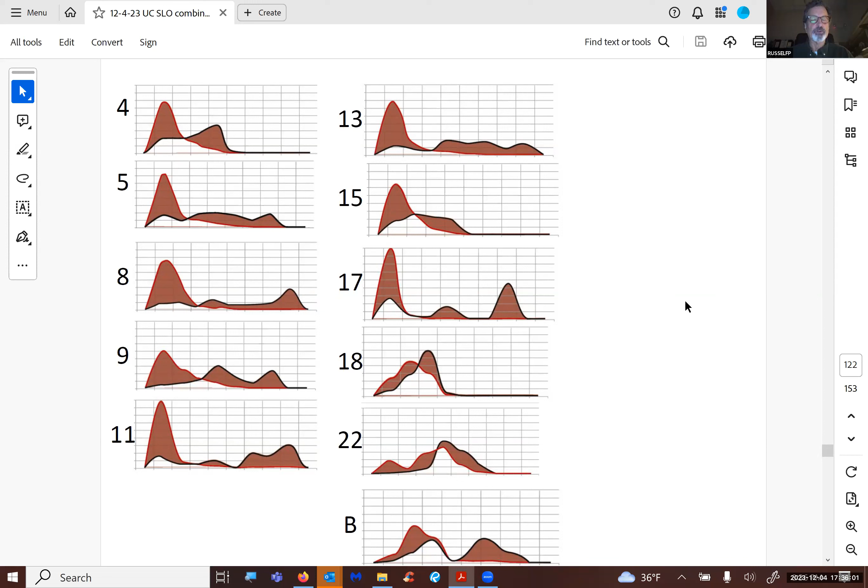It was really fun graphically, but in the end we didn't come to a conclusion. I'm going to run this through ChatGPT and see if AI can draw some connections and conclusions about the comparison of the quantitative typological aspects that exist in these different samples.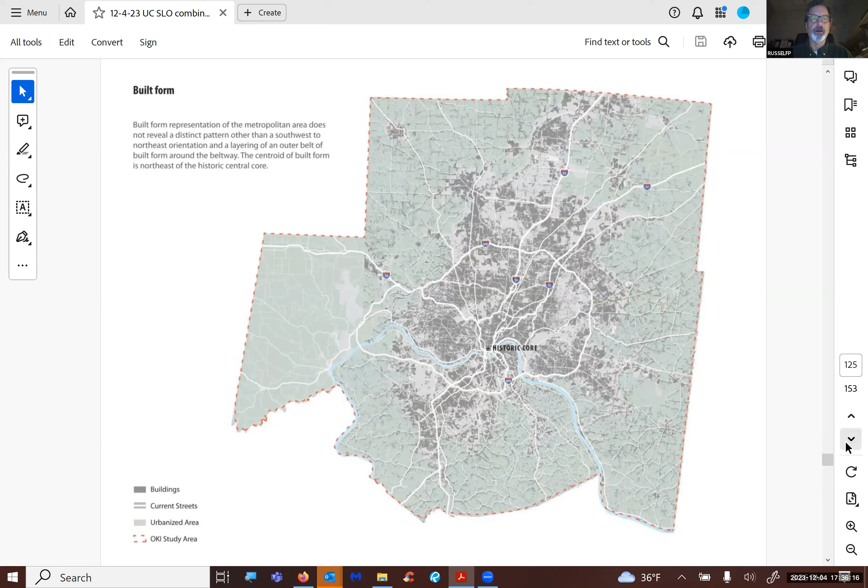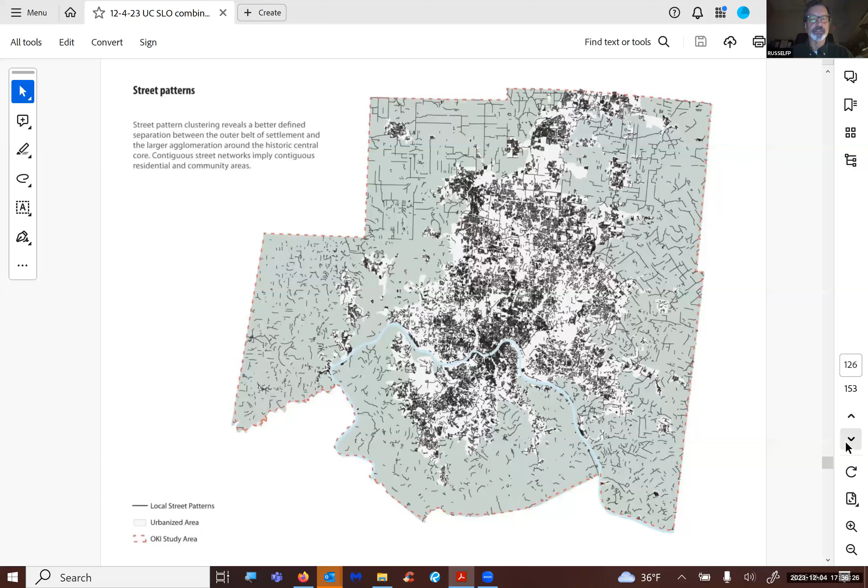What it did lead us to think about was understanding the topography of the area and the built form and street network, laying these out at the metro scale and blurring them so we could start to see enclaves. What we pulled out of this was that the district, even the metropolitan area, even though there's a certain sameness to what we're seeing, has very specific enclaves that exist, primarily structured around street networks that you can see here clearly.

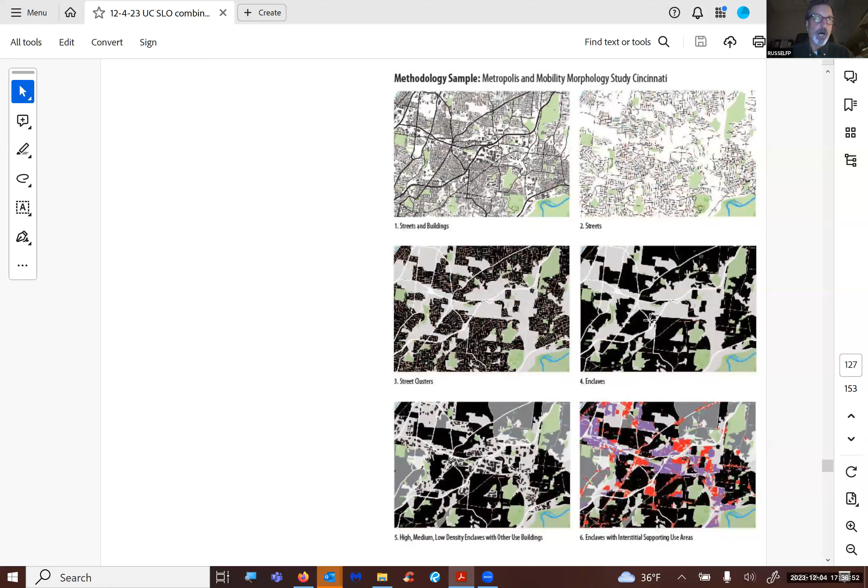The street network clusters constitute very clear enclaves, if you will, and here they're represented more graphically so you can understand them. So we understand the metro area now in its morphological form as three different bands of clusters of enclaves—the constellation of enclaves, if you will. We have the inner ring, the center core, the historical core.

We have the streetcar suburbs or first suburbs, if you will, and then we have the outer core, which is the low density suburban areas. But they are all enclaves, and they're all fragmented in this way, which is very unfortunate and makes it very difficult for transportation.

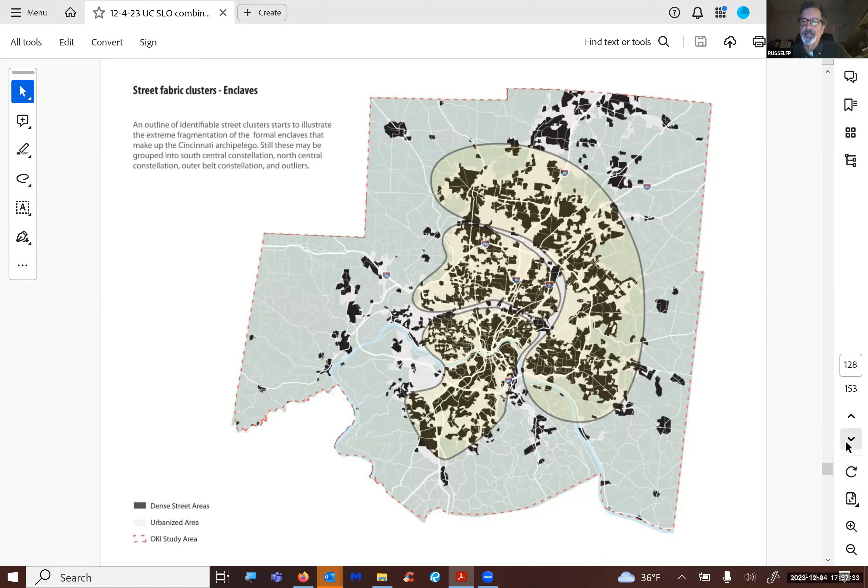So if we just look at the high density and medium density, that's what it looks like. We find these interesting little stragglers out here, and wonder what they're doing out there. Then the low density, it's a mat.

It just occurs across the entire region. This is all suburban sprawl, and it's held together with the highways.

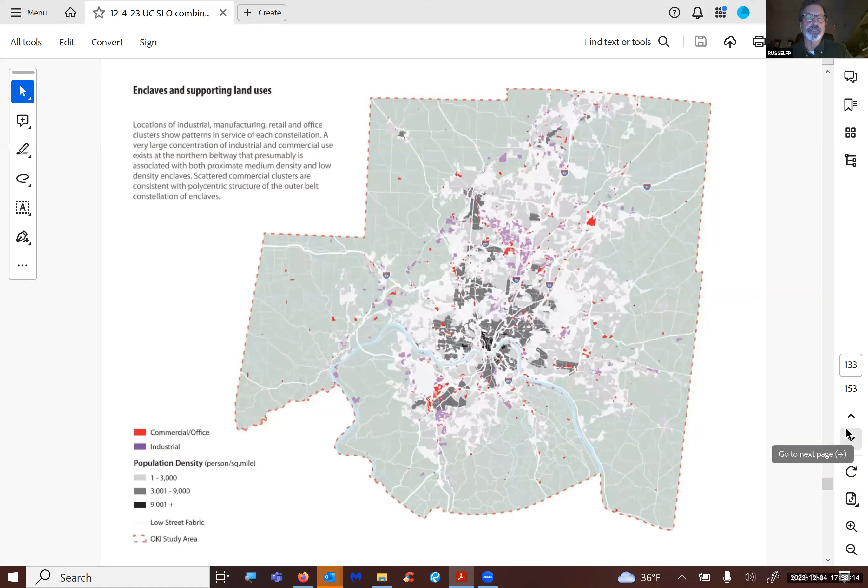So we started to look at the supporting uses as well, to understand those and how they interrelated to the form, and looked at the major employment areas. We do luckily have lots of employment in the center city, but we also have tons of employment in the outer area.

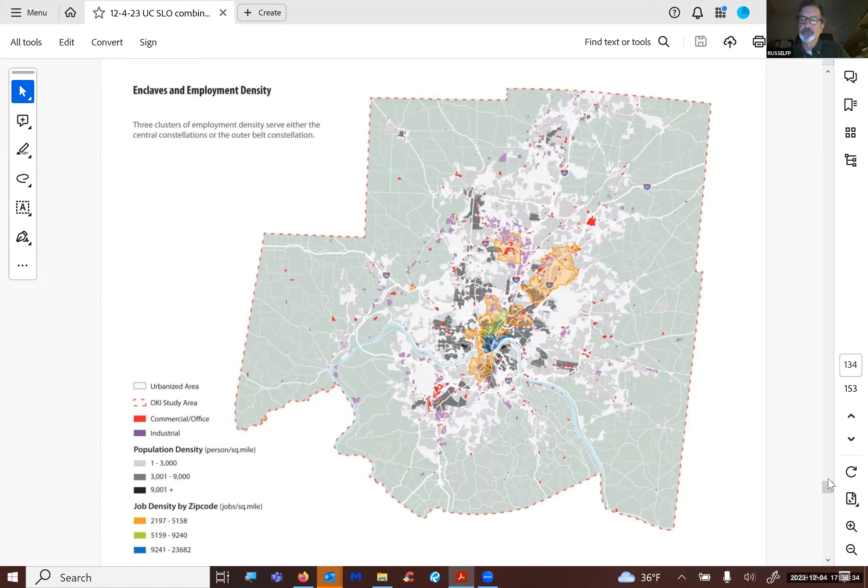These are manufacturing and distribution areas, and they're in the suburbs. But of the high density, you see these little stragglers out there. What were they doing? So we looked at what related to those, all the elements and the stragglers as well.

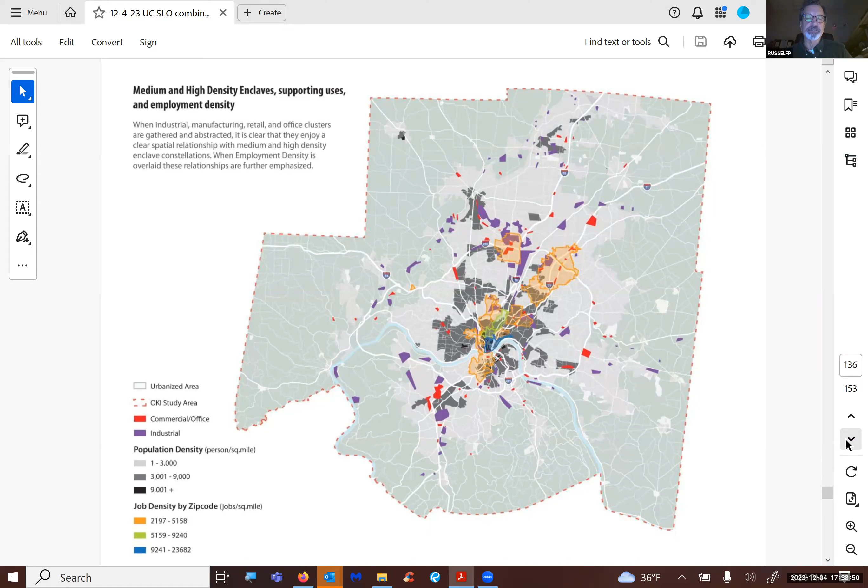Then we looked at the topography again to figure out how it all related. This is a bit more of an abstraction to help you see the high density and medium density enclaves, as well as the supporting uses you see in purple for industrial and red for retail, and how it all lays out in terms of the topo.

It's obvious that the more dense development wants to be in the flatter locations, it doesn't want to be in the upper locations. So much of that is a product of the availability of flat land, but also the availability of transportation in the 19th century, which was the railways.

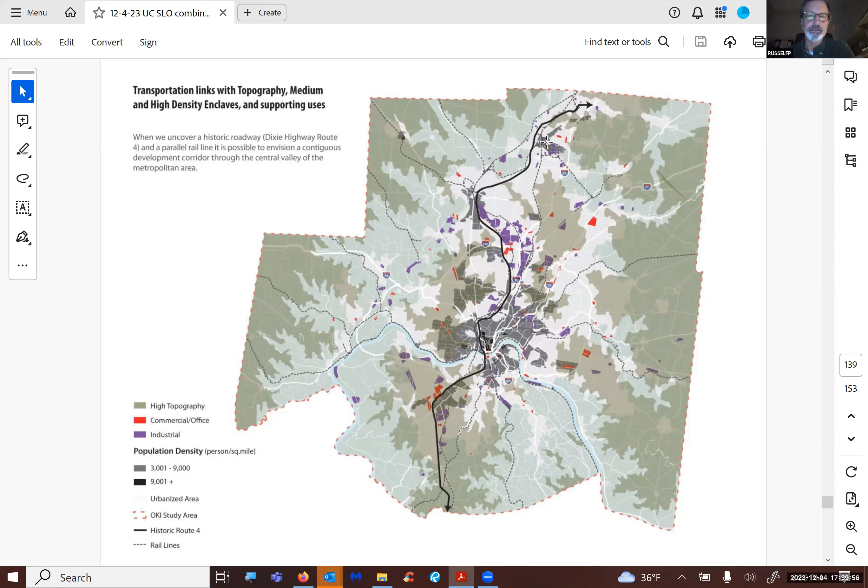Seems obvious, right? So this graphical analysis helps us understand: we've got a state highway here that could accommodate bus rapid transit, and we have lots of rail lines that could accommodate rail transit. All this ties together these stragglers of high density, which are underutilized for housing, to the urban core and beyond.

We also looked at the employment opportunities that exist, and found that a great bulk of jobs actually exist in this corridor. So that was our pitch, that we could create this new linear system that heads essentially there, but it's latent, abandoned, to pull together the entire region along this system.

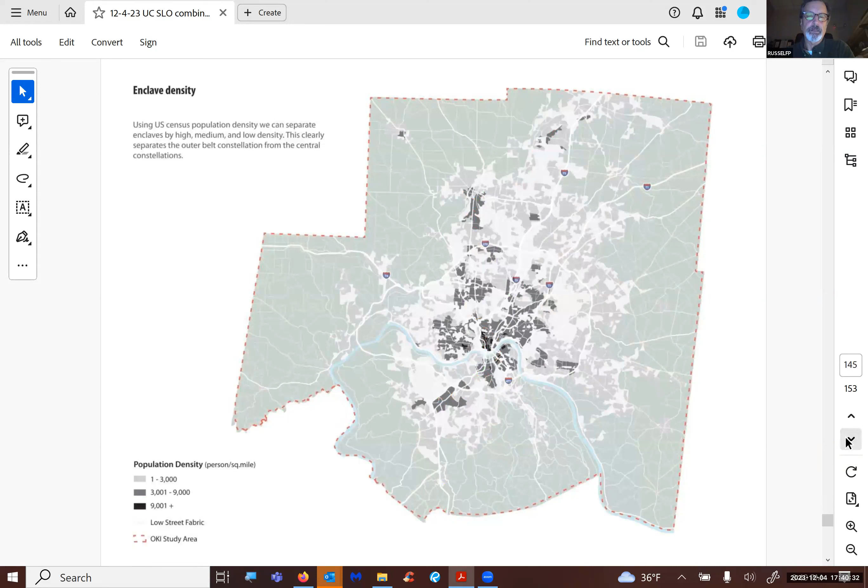But what do we do about the low density, all this stuff with its employment capacity and retail capacity? Well, we let it be there. We let it continue to exist. It exists with its own system of movement, which is primarily roadways, and just stays the way it is.

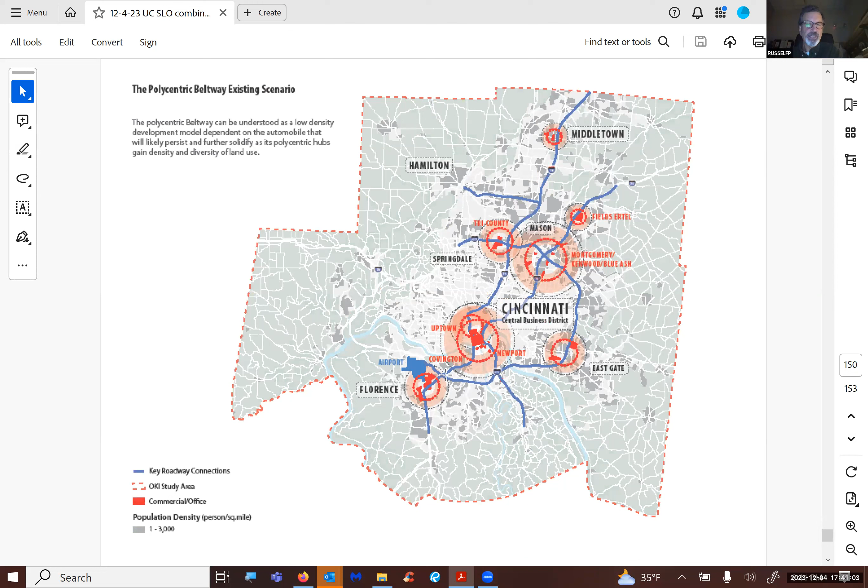You want to live there, you get to live in the polycentric city, enjoy that life, suburban sprawl and lots of land. You still connect to the urban core, and that's great. We're not going to fight it.

But for those who want to be in a dense urban environment and rely less on automobiles, while still having a connection to the urban center, they can live a different life along this urban corridor. So that ended up being our pitch for the transportation opportunities that exist within the historic morphology of the region.

No one's taking us up on it so far.

Have you guys thought of a network a little bit like Curitiba, in which you have feeder lines from the low density neighborhoods to this rapid bus rapid transit or rail or whatever transit spines? Like the last mile?

Yeah, like park and ride or something like that. Or so, yeah, for sure.

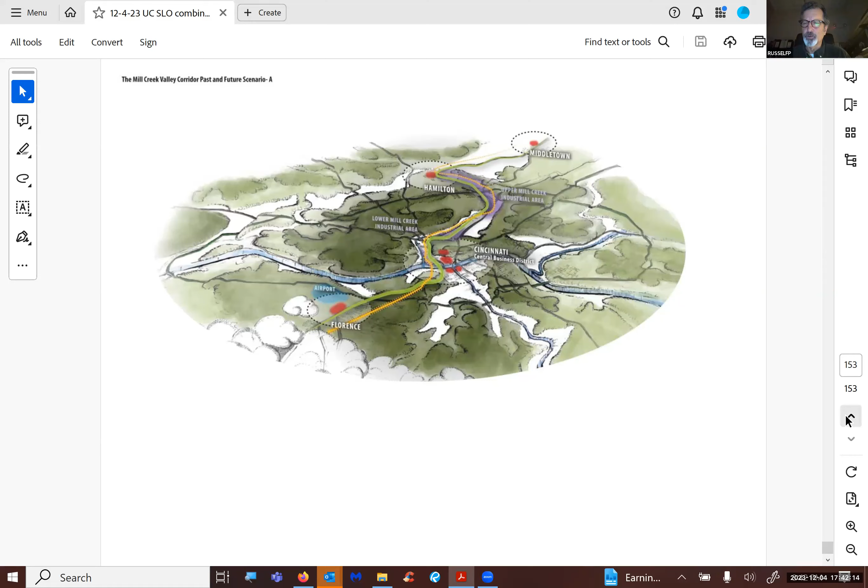I mean, if you go this corridor we're showing here, this is looking at about a mile and a half, which is a long way to walk. You're not walking that far, but you could get last mile transportation, whether it's bikes, shuttles, vans, or of course surface buses, that would bring people to the line.

We don't have the ability like Curitiba to create a geometrically perfect line one way or the other, because we've got this topography to deal with. And honestly, the right-of-ways aren't there anymore.

But right-of-ways remain here. Those rail line right-of-ways exist. Of course, much of it is freight, so we'd have to fight the freight companies to get passenger rail in there. But it exists.

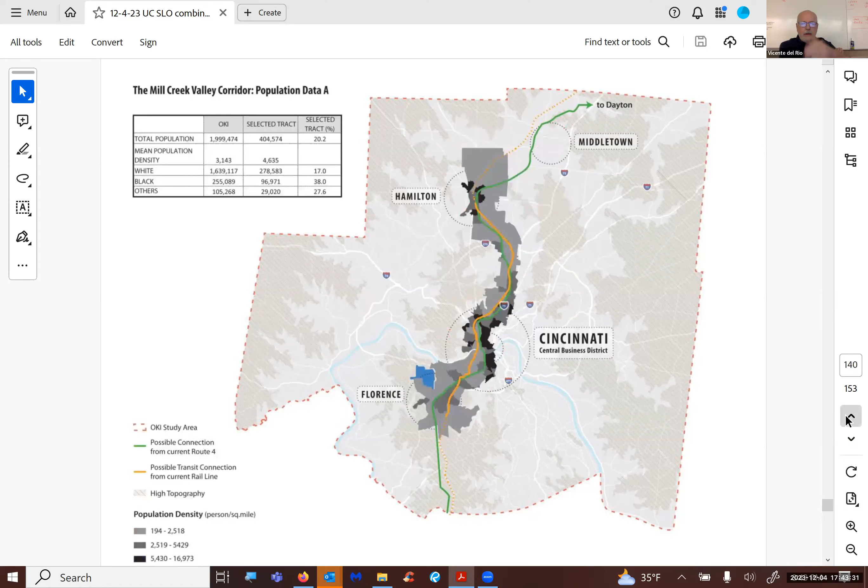Yeah, what's interesting about the city morphology is that it could not develop along the river, because the valley along the river was not wide enough for the city to grow. So it went perpendicular to the river. It was pinched, pinched right here.

Here you have the ability to spread out, but even these don't look like it, they look like low-lying areas, but they're actually high enough to be difficult to develop on. But yeah, you're sort of pinched, but you do have that mouth, which is sort of nice.

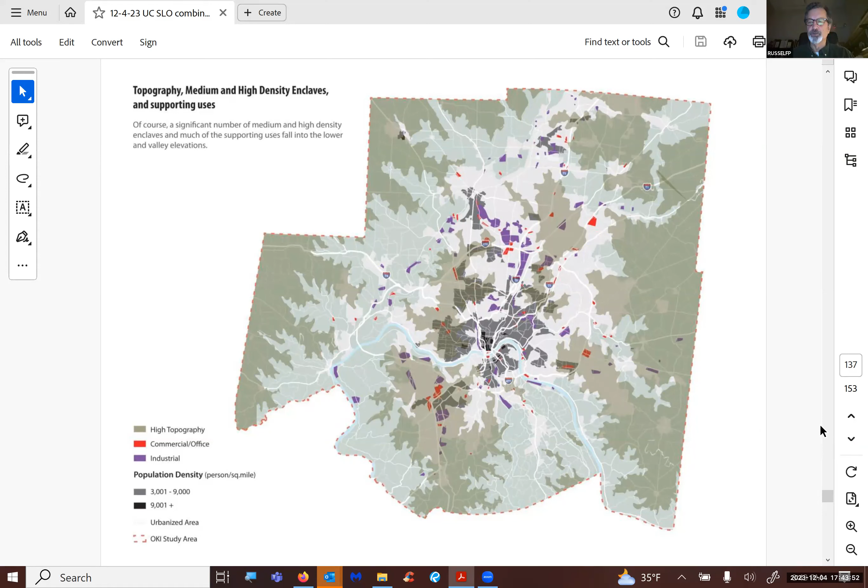Go back to that. Yeah, so you have this mouth here, and that's where everything developed. But you're pinched going in either direction. And we never really understood why this didn't get developed - it is very undeveloped in that area. We just suspect that's where the trade node occurred, right at this valley, and that's where development sort of radiated from.

So anyway, it all comes back to the nature of the landform. The topo is right, but the topo is generated by the water, which you still struggle with, and new urban forms are emerging with our continued struggle to deal with water. But other progressive forms are available that allow us to take advantage of the legacy we've been left behind because of the water.

Okay, thank you. We got 15 minutes, Frank. Can you close up? Maybe we have some questions - sorry, I don't want to interrupt you, but I'm just the timekeeper here. I think I've thrown enough at the wall here, let's see what sticks. Okay, so anybody, please address your questions. Douglas, you always have questions, I know you are dying to ask questions. So if you do have questions, please come here or get somebody's computer and do it.

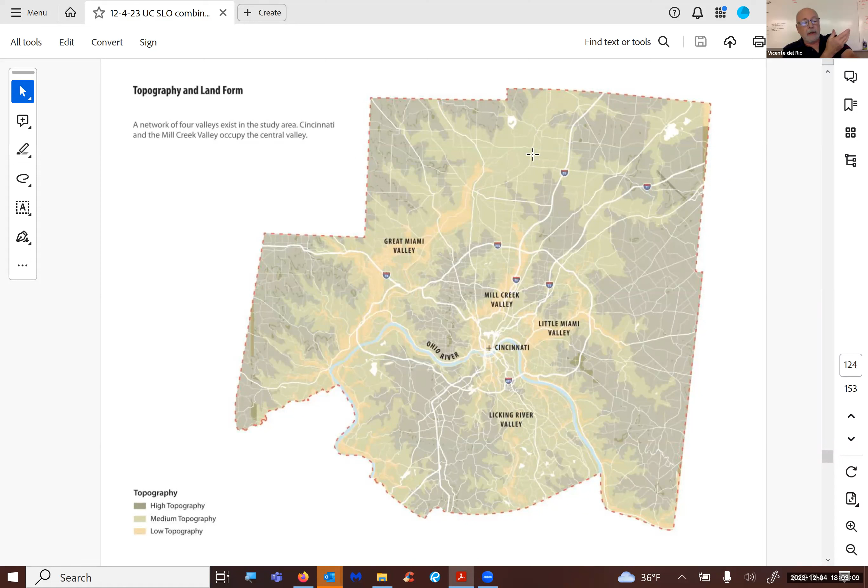It was a great presentation. It's very nice to see that a university design center that really works. We don't have that here—we do a lot of community work through the studios, but we don't have a center like that. I wish we could have that.

Well, it doesn't exist anymore. It doesn't? No. That's the thing—it got extinguished. You need someone to champion it, someone to go out and raise the money for it and advocate for it. Without that, everybody's too busy—mainline faculty don't have time.

Okay, okay, so do you want to ask a question? Come here, yeah, because everybody, I mean, everybody dropped out.

Emilio, our transportation guy, has a question. Not transportation related. It's not transportation related.

Quick question, when you're talking about the community design center, you kept mentioning the technical assistance, and I could kind of wrap my head around the policy and community engagement work you guys did, but what exactly does technical assistance entail?

Doing the architectural drawings, the construction drawings, getting the permit, actually supervising construction. So the process. Yeah, or we actually built things, design build. We were actually building spaces and instruments, or in the case of the vending cart, actually building the vending cart. So the actual applied work—once we finish the studio project and want to continue it into something that would actually get built, then the students would get paid to do that work.